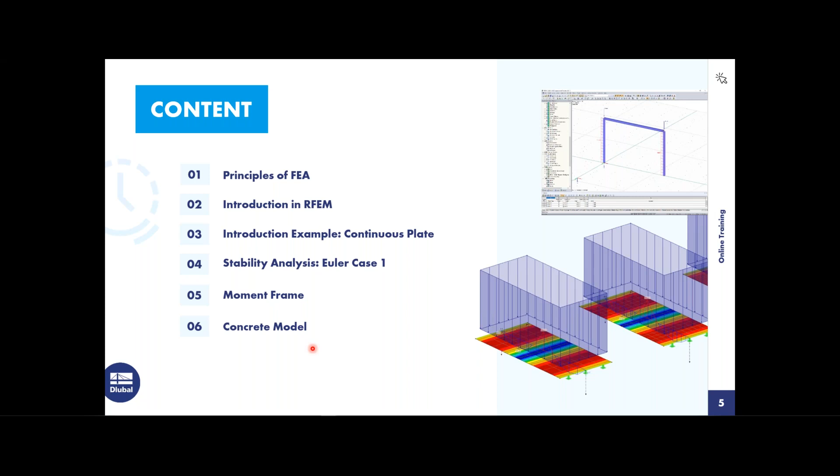Here's the content for today's training. First, we're going to start off with learning about the principles of FEA, and then I will go into an introduction to RFEM. After that, an introduction example will be done for continuous plates. Then I'll go through a stability analysis, or Euler case 1 example, followed by a moment frame example. Lastly, we'll end with a concrete model, and I'll try to leave some time at the end for questions as well.

To start off, we are going to go through the basics of finite element analysis. Computer software is based on the displacement method. Another method you may be aware of is the force method, where the unknown is the force, and you can calculate the internal forces based on this. With the displacement method, the unknown is the displacement of the structure or element you are modeling. First you calculate the displacement vectors using the displacement method, then the internal forces, and after that, the support reactions.

An analytical solution can be proven difficult with large complicated structures. Doing high-end calculations for a large complicated structure can almost seem impossible, and the limits are basically being reached for this, so it is hard to yield accurate results. This is where FEA is then required.

With FEA, the structure model is taken into the program and converted into a finite interconnected element mesh. Then the material and cross-section properties are given at each of these FE nodes, and the mechanical behavior is transferred between each of these elements within the structure. I would also like to point out a good word to know: discretization. This is basically when the structure mesh is being submeshed into finite elements. I'd like you to walk away with this word.

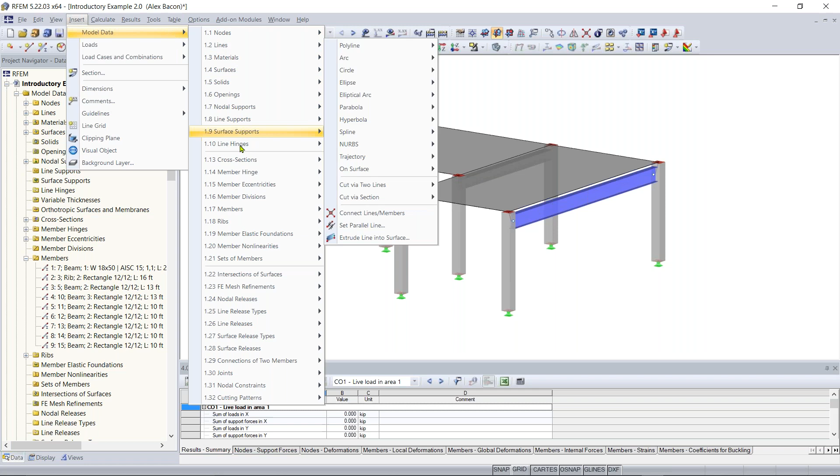We also have the insert menu up here in our menu bar, and this is where you can access model data and create nodes, lines, materials, etc. You can also create loads within this insert menu.

Now, if we want to change our view within this work window, we can do that up here in the view section of the toolbar. If I want to get a side view of either the XZ plane or the YZ plane, we can do that. We can also look at the Z direction to get a top-down view. There's also more options within this drop-down menu, and we can view the reverse Z direction to get a bottom view of our structure. We can also set our structure to an isometric view to get a nice clean view, which is also helpful if you need to reset the view of your model.

On the left-hand side here, back in our project navigator, we have at the bottom the list of add-on modules within RFEM. With the student license, you do have access to all of these add-on modules, which is very nice.

These add-on modules are used to design. RFEM is great for getting the analysis of internal forces and deformations on your structure, but if you want to design something, such as a concrete member or a concrete surface, you need these add-on modules. You don't have to have all of them—let's say you only want to design concrete members and surfaces, you can simply purchase those add-on modules. But for you guys, they all come with the student license.

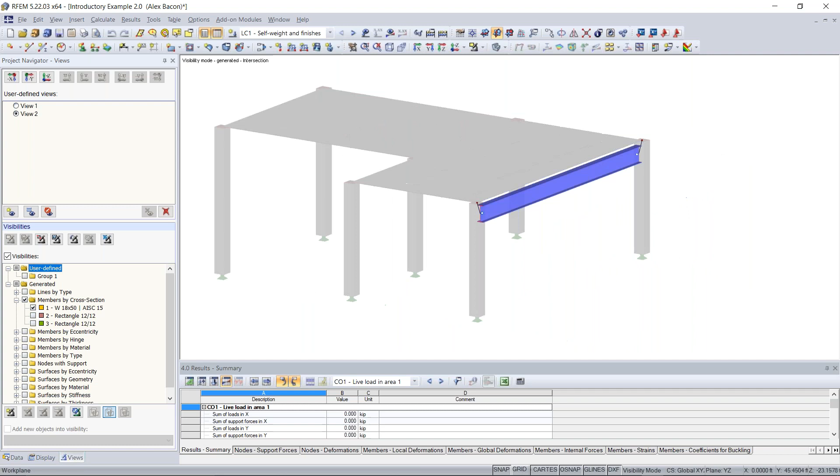Next tab is the Views tab. Within the Views tab, you can create visibilities. Let's say you want to view only members by cross section—I can go up here to members by cross section and click on these. Let's say I only want to view my 18 by 50 W shape—you can do that easily within this Views tab. You can see the visibility is checked on, so I can turn that off, and now I get the whole view of my structure. You can also go up here and create or save customized views if you would like, so you can easily access them.

Next, we can view results. I can go up here to my Calculate All button, and this will run a calculation on our structure. Right now I'm only viewing one load case, the self-weight of the structure, so you can see all my global deformations are being shown right now. I can get an idea of how the structure will handle the self-weight. On the right-hand side here we have our panel, which gives us the corresponding numeric value with each color.

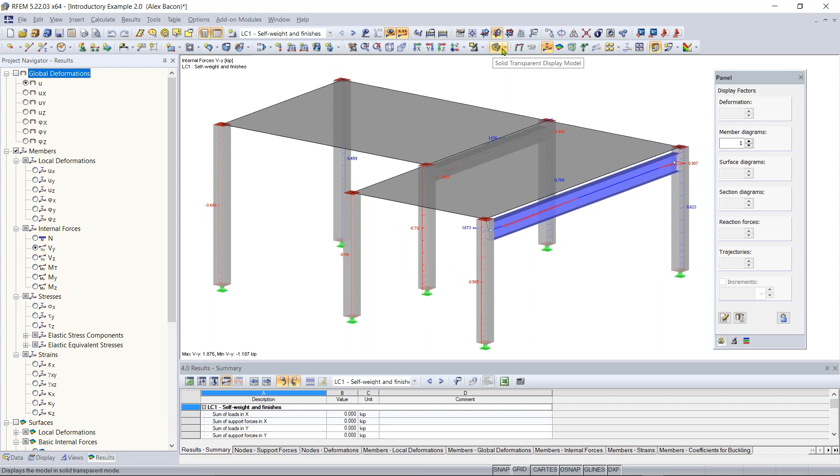On the left-hand side here, again, we have our options or data organized in trees. Right now I'm viewing my global deformations, but maybe I want to view the internal forces or the shear on my members. So I can view the shear in the Y direction on my members, and that will give me these diagrams. You can see I can also change the rendering of this model to get a better view of these diagrams—I can change the view to just a wireframe view. The red diagrams show negative, which are compression forces, and the blue show positive forces, those in tension. I can also view my moments and my axial forces as well.

So basically, that is the overlay or overview of the UI within RFEM. We'll get more in depth in this within the examples coming up.

And now I would like to pose a question or a test. So now this test will launch right now. I'll give you guys about half a minute to answer that. I'll give you about 20 more seconds. Wait for the majority of people to answer. Okay, looks like mostly everyone answered, so I'm going to close the test about right now.

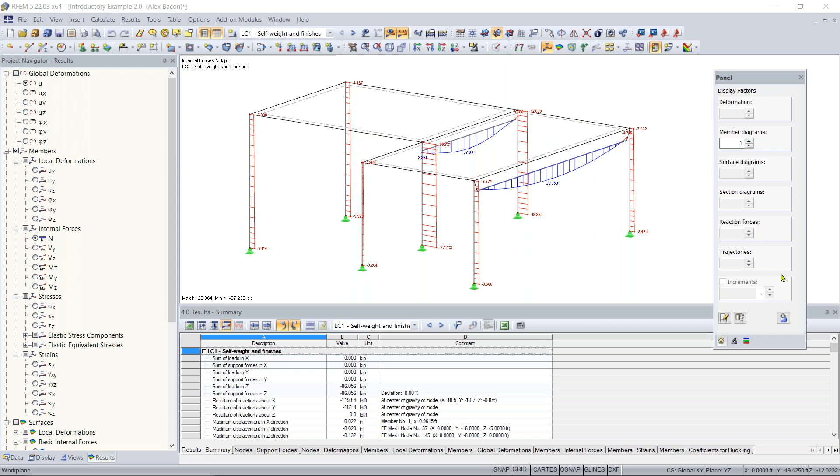So I'm going to hide that. And now you should see RFEM. Up here, if you don't see your project navigator or the table at the bottom, there's two buttons next to your toolbar here, and you can turn on and off the project navigator. You can also turn on and off the table at the bottom here. I usually like to have the table turned off just so you have more real estate within your work window.

So now to move on to the continuous plate example. The first thing we want to do is go up here to the left-hand side, and we can click on our button up here called New Model. You can also find this under File, and we can hit New. This will bring up our general data window for us to create our new model. Basically we just have to enter in this information and work our way down. The first thing I'm going to do is enter the name. So I'm going to enter the name continuous model.

You can enter a description if you'd like, but it's not required. You can also have your own projects or have RFEM organize your models into project folders if you'd like by creating a new project and checking out your project manager here. I'm not going to do that for this example. And then for this type of model, since we can have it as just a 2D model, I'm just going to keep it in a 3D model, but you also have the options to only create 2D models if you'd like.

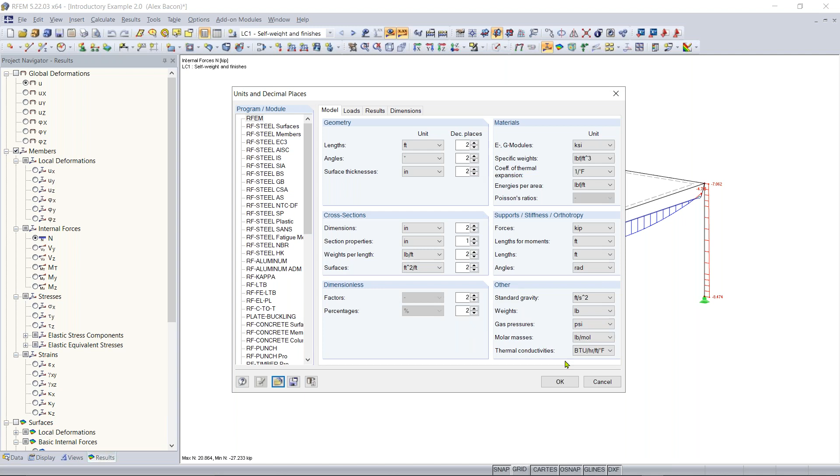And that'll change and convert all of your units to metric. Here you can also change individual units throughout the model, loads, results, and dimensions, and you can also increase or decrease your decimal places as well. I'm going to leave all that as default and leave it in imperial. And then I'm going to click OK.

So now you can see that we have our blank work window, and this is where we're going to be modeling. There are lots of different ways you can model. You can use the tables to enter input data if you find numerically inputting your model data more efficient.

For this example, I'm just going to use the tools in our toolbar. I'm going to go to the left-hand side and click New Single Member. This would be the tool to use if you were going to create your I-beam or members, but first we're going to model the continuous plates, so I'm going to exit out of that.

Then I'm going to go to this tool called New Rectangular Surface and click on it. Now you can see we have our New Rectangular Surface window, and this is where you're going to enter the data needed to create the surface.

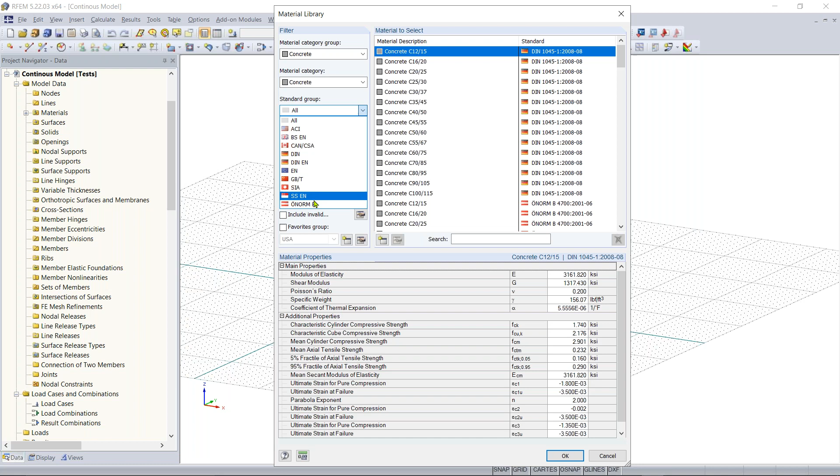Now you can see this window pop up called Material Library. On the left-hand side we can filter by category group and then standard group. First I want to click on this dropdown and select concrete, and the material category I want is just regular concrete. Then for the standard group, I'm going to use ACI, but we also have other standards such as CSA, etc. So I'll choose ACI, make sure I choose the latest ACI standard, and then I'll just use 4,000 PSI concrete.

You can also edit the material if you'd like once you create it. I'm going to click OK, and now you can see the material is set to 4,000 PSI concrete, and my option to edit material is right here. You can edit any of these material constants, such as the modulus of elasticity, shear modulus, Poisson's ratio, etc. You can also create a new material if you'd like.

Now I would like to change the thickness of this material. Right now it's set to 8 inches by default. I'm just going to make this 12 inches, and then I'm going to click OK.

Now I'm going to just rotate my grid plane here. You can see that we have our origin at the center, and my cursor has the coordinates locked to it, and you can see that it snaps to any of these points on the grid.

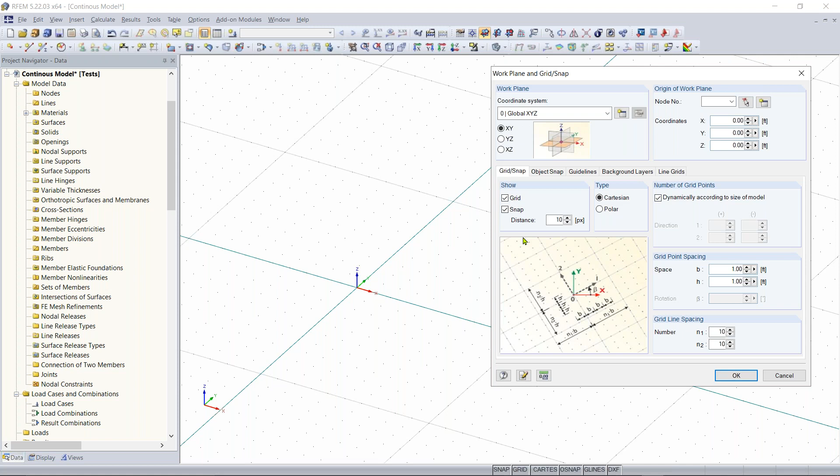We also have this nifty option called dynamically according to the size of manual or of model. This is nice because if you don't want to worry about how big your grid is, and you just want the grid to change size depending on the size of your model, you can have it do that.

So now back to creating this rectangular surface. I'm going to click on rectangular surface again, and then I'm going to click on OK, and this will bring my modified cursor back up.

So now I'm going to rotate the model using the mouse and keyboard, and click on the origin, left click, and now I am drawing my rectangular surface. I want this rectangular surface to be 32 feet by 16 feet, so I'm going 32 feet in the X direction, and I'm looking at my coordinates seeing 32, and I want 16 feet to be my Y coordinate or height. I'm going to left click, and now you can see that rectangular surface has been created within this grid plane.

Now I'm going to create another rectangular surface 5 feet above this one. So that's going to be here. I'm going to left click, and then draw it again and make sure that it is 16 feet high. So that will be right about here.

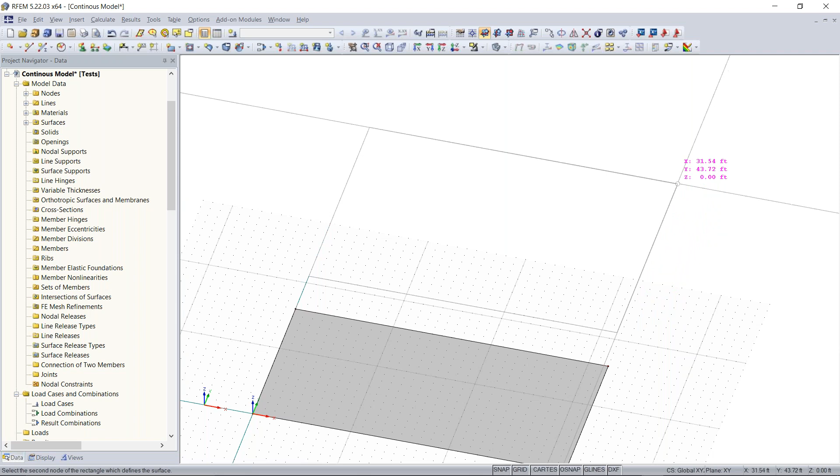And that looks too high. So what we can do is highlight, double click on the node. I can change this from 44 feet to 36 feet. There we go.

So now that our second plate has been created, instead of having to recreate this plate, we can simply select the whole plate and copy and paste it. I'm going to select this plate, and we have a feature called move and copy. I can right click on this plate and go up to my move and copy tool, or I can also use the move and copy tool in the toolbar.

You have to make sure that you have your element highlighted. This is also a good time to mention highlighting things. Highlighting something from left to right is different from highlighting something from right to left. If you highlight from left to right, this will only select elements within this window, but if you highlight from right to left, it'll select any element that touches the window.

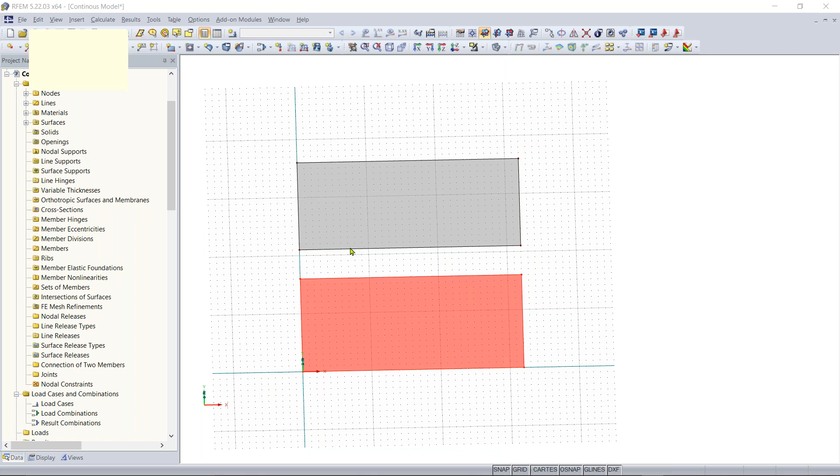So I'm going to highlight this plate, go up to my move and copy tool, and make just one copy of this plate, moving it in the Y direction. I can enter the coordinates where I want this plate to go, or I can use this button to create a displacement vector graphically. So I'm going to click on the corner of my plate, and I want it to be 5 feet above this plate. So 2, 3, 4, 5.

It's going to go right here. So now that my vector is created, it's going to move it 41 feet in the Y direction, make one copy. I'll click OK. And now you can see that the plate has moved 41 feet in the Y direction, and it's 5 feet above the second plate.

So now I want to make all these three plates, and I want the center of all of them to be on our origin. So I'm going to highlight, and then click. I want this corner, this left-hand corner of this plate, to be on the origin. So I'm going to click on that, and then move it down by just left-clicking and dragging. That's an easy way to highlight and move things within RFEM.

Now we can create the continuous beam, or create the new member. So up here, this button I showed earlier, we can click on new single member. And you can see that now our new single member window has popped up. Again, this looks pretty familiar to the rectangular surface. We have our member number here, and then down here, we have our cross-section.

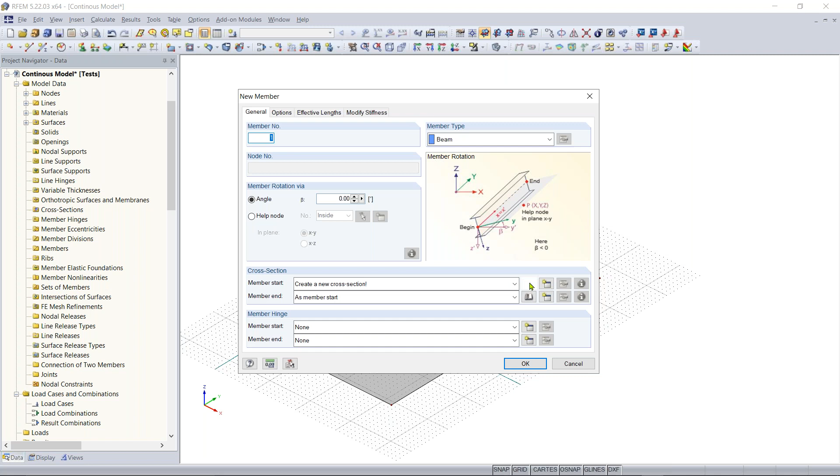This is where I'm going to create my cross-section. So right now there's no cross-section defined, so I'm going to go here to import from cross-section library, and I want to create a rectangular concrete cross-section. Within this library, we have rolled sections, built-up sections, parametric thin-walled sections. Today we're just going to focus on our parametric massive sections, and I want to make a rectangular section. So I'm going to click on rectangle, and you can see you have lots of different types to pick from within these cross-section types.

I want the base of my cross-section to be 40 inches, and the height of the cross-section is going to be 12 inches. This is the same thickness as our plates, 12 inches. You can see how the base and height correspond in this graphic here. You can also see that the material is set to concrete 4000 PSI. So I'm going to click OK.

And now my cross-section is shown on the right-hand side here, and the start of my member has this particular cross-section. So I'm going to click OK.

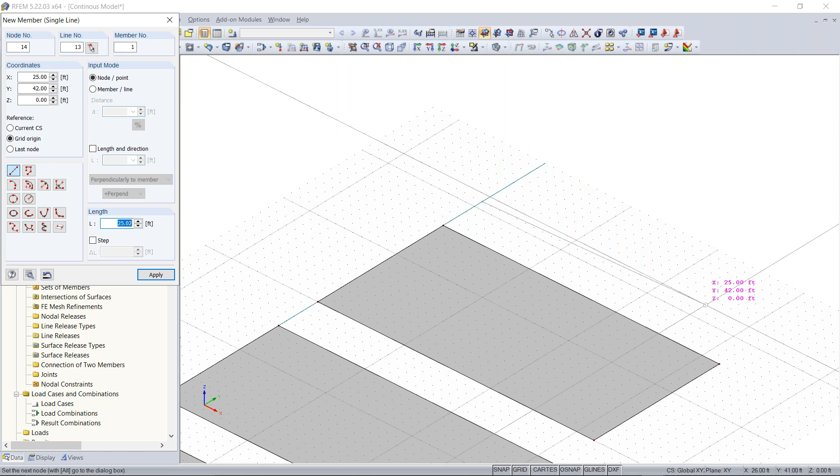And now my cursor is ready for me to draw in the work window the continuous beam. I'm going to space this 5 feet away from my previous plates, and I'm going to left click here—you can see there's a line showing you what you're about to draw. I'm going to make this the same length as my plate. I'll left click, and now you can see my rectangular concrete beam has been drawn.

Now we can go through, and I want to add a line, or a continuous support, down the middle of these plates, and I want to add a support to this beam. So let's say I want to divide these lines here. Right now they're continuous lines, and I want to divide them and add a node in the middle so I can draw a line down the middle.

An easy way to do that is just to right click on the line. You can right click anywhere within this work window, and you'll see a list of tools that are easily accessible—these are the tools you'll mostly use. You can also turn off and on some other options in this menu. If you want to edit an element, you right click on that element and get different tools based on what you've clicked on. You can also edit or delete the surface within this menu.

So down here, I'm going to start with this line. I'm going to right click on this one line, and then go up here to divide line. You can see under divide line we have 3 different options. The first option I'll show is how to divide a line by distance. I basically just want to create a node at the middle of this line, so I want to set the line start at 50% and the line end at 50%.

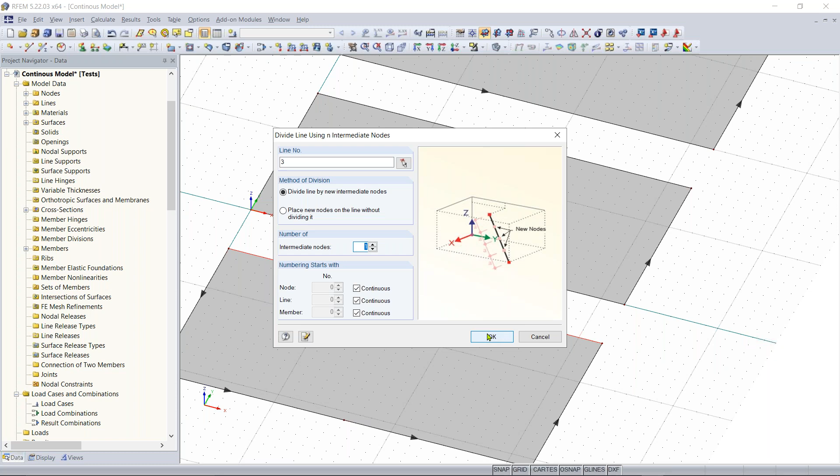So now I can do this for the rest of my lines. I'm going to right click on this line, and I can also do this by going to n intermediate nodes, and set that to 1. This will equally space out the nodes depending on how many you want to place on your line—so if I just create 1, it'll divide the line and create this node in the middle.

The third option for dividing a line is doing it graphically. Once I do that, you can see the coordinate pops up next to my cursor, and I can place that node anywhere I want on the line and click to divide it. Then I can right click anywhere in the space to cancel out of that tool.

Now I'm going to do that for the rest of my lines. I'll right click, divide line, distance. Instead of doing this for each individual line, I can go up here to the select lines button, select the rest of these lines, and hit OK to divide all of them as well. So now we have nodes at the middle of our lines for each of our plates.

Now I'm going to do the same thing—divide this member. Again we have the same options. I'm going to do this by distance, and make the node at 50% of the member. So now our member is divided as well, with a node there.

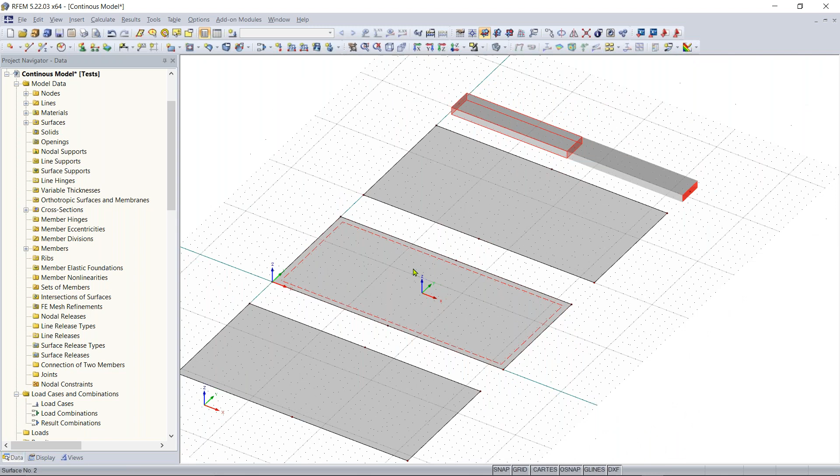Now I'd like to draw a line connecting these 2 nodes—this is where our line support is going to go, supporting the midspan of these plates. I can go up here, and there's a tool next to the new single member tool called New Line. I'm going to click on that, and now I can draw just a line connecting these 2 nodes. When you draw a line, make sure you right click outside of it to cancel out drawing the line continuously. I'm going to connect these two nodes here.

Now that those nodes have been connected, we can simply add our line supports in as well. I wanted to show you another great option: if you press Control Z, you can undo things. And instead of having to draw the rest of these lines, I can hold Control, then left click and drag, and that will make a copy of anything that was highlighted.

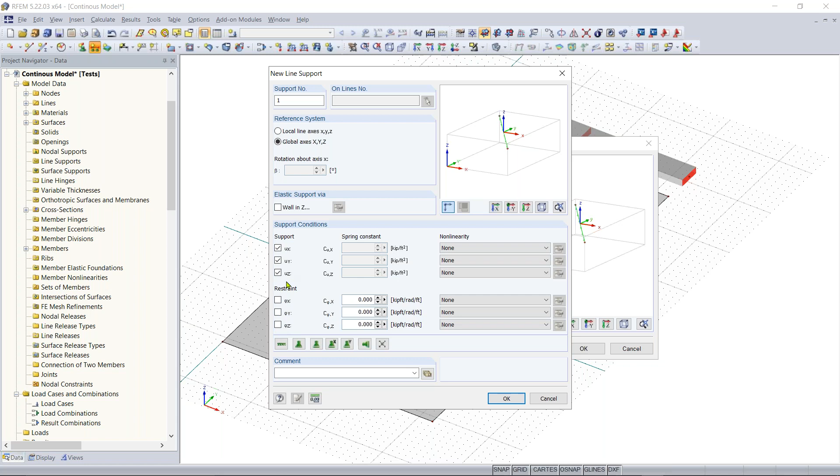Right now, our support is set in the translational to all fixed. So if I check off UX, that means the support will not allow the structure to move in the X direction. But if I uncheck it, that unlocks that direction. Right now, all rotation is not fixed, and the structure is able to rotate about that support. So this is what we're going to keep. I'm going to click OK again.

Now we can apply this line support to all of our midspan lines here. So now you can see this green line along with our green line supports is added. I also wanted to add the support to the edges of our plates.

To do that, I'm going to hold Control, click, and add those line supports to the ends of our plates as well. Make sure everything is highlighted before you click, hold Control, drag. Now we can add those supports to our outside lines as well. This one doesn't seem to want to go - no matter, I can just go up here to my tool, click OK, and just add that graphically.

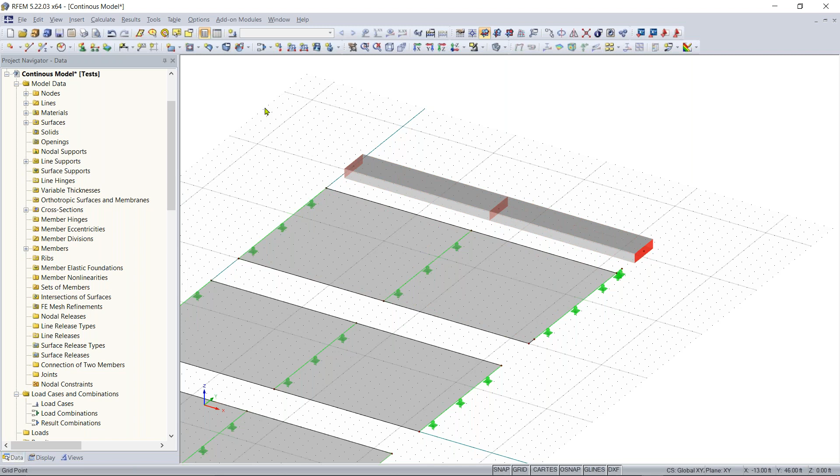To do that, instead of adding line supports, these are just going to be nodal supports. So I'm going to go up here to New Nodal Support. The first two nodal supports, the midspan support and the first end support, are going to be a hinge support. I'm going to simply add that to these two nodes right here and right click. Now you can see we have a hinge support in the middle that allows full rotation but no translation, and this end support allows full rotation and no translation.

Now we just have to add one more nodal support to the end here. This one's a little bit different - I'm going to create a new nodal support for this one. This one is right now allowed to rotate about the x-axis, but we don't want that, so I'm going to fix that. So now the member is not allowed to rotate about the axis, which if we did not do this, it could rotate indefinitely and create a stability error within the program.

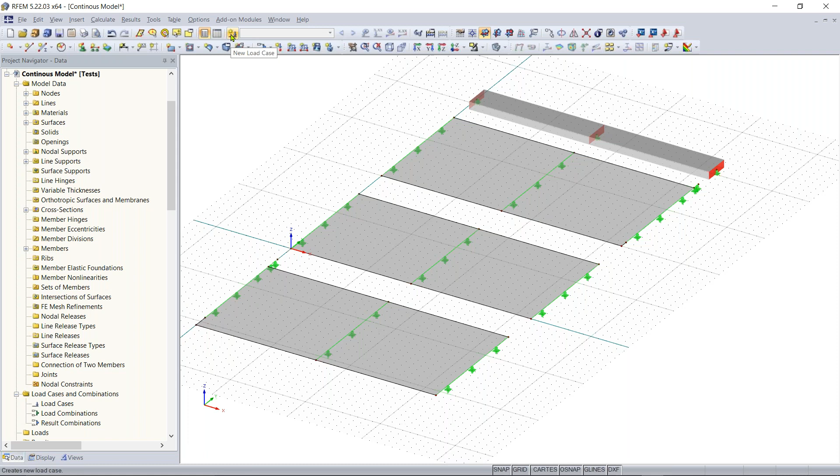So now that we have our supports defined and all of our model data entered, almost, we can now focus on adding the loads to these different elements. It's important that when we add our loads in, we create a new load case, because every load needs to be assigned to a load case. To do that, we can go up here to this button called New Load Case and click on that. We can also go on the left-hand side in our project navigator, down to Load Cases and Combinations and Load Cases, and right-click on Load Case and click New Load Case.

So now you can see that the Edit Load Cases and Combinations window pops up, and we are under our Load Cases tab here, and the program has created a new load case for us. I'm just going to call this load case test and dead load.

I'm also going to put in here that the self weight of the structure is off. Right now that's the title, and the action category of this load case is dead. For dead loads, the self weight of the structure is automatically taken into account, but for this example, I'm going to turn that off, and I'm going to click OK.

So now our load case is created, and you can see that up here in our drop-down window, we have one load case. And now I can apply the loads to the surfaces.

So now I'm going to go up here to this tool called New Surface Load. The load type is going to be a force, and the load distribution is going to be uniform. We have other options here, but for this example, we are going to stick with these two. I want this force applied in the global related to true area. So this is all good, we don't have to change any of this.

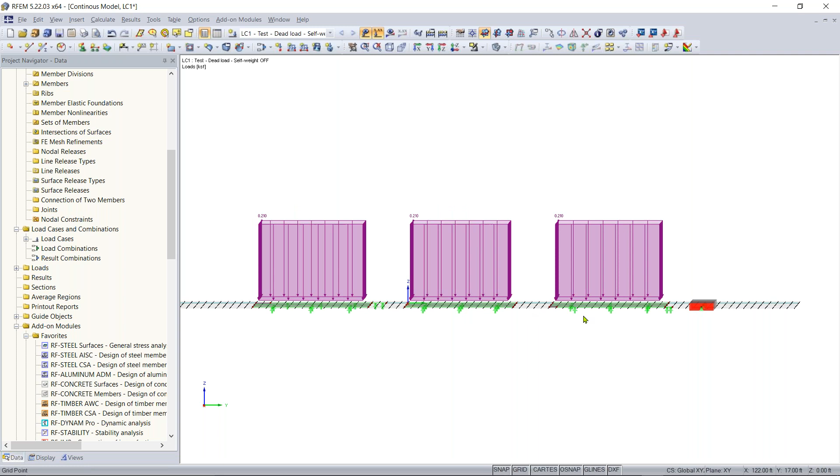So rotating the structure, you can see that our loads are applied to each plate, and we need to add a load to our continuous beam here. I can also increase the size of these nodes. There we go. And now I can add in a member load.

So to create a new member load, this is up here in this toolbar next to new surface load. I'm going to click on new member load. Also another thing to keep in mind is we have a tool for member loads and a tool for line loads.

So just remember that you should use member loads for members and you should only use line loads for lines. Line loads are basically if you wanted to apply loads to only the perimeter of these plates or to these lines. And then member loads are for members or beams and columns.

This member load window looks basically similar to the plate load window. Under the load type, we have force, which we're going to keep the same, and then we have a uniform load distribution, which we're also going to keep the same. This load is going to be applied in the global related to true member length Z direction. So all this by default looks good.

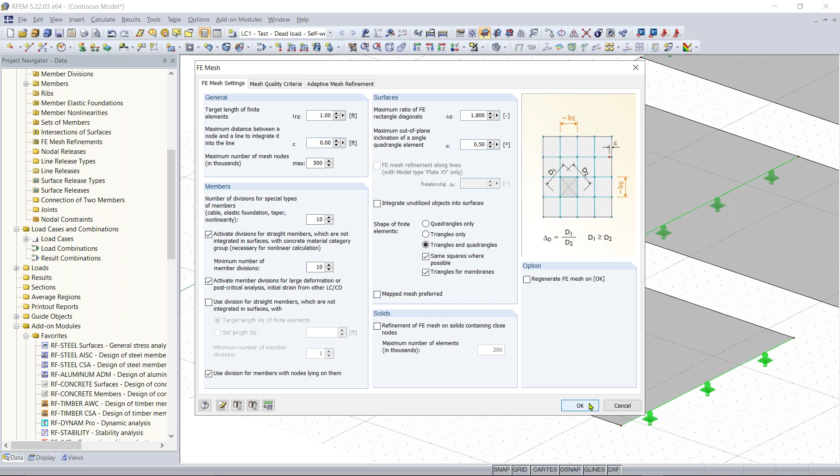But let's say we want to change the FE mesh of an individual element. We can do this, and I'm going to do this solely just for this example, just to show you how the results differ for a larger FE mesh compared to a smaller FE mesh.

So what I'm going to do is double click on this plate, and this will bring up the Edit Surface window here. This is nice because if I wanted to change maybe the thickness or material of the plate, I can do that very quickly.

And I'm going to go up here to my FE mesh tab, and then I'm going to go to FE mesh refinement, and I'm going to click Available. So that will create a new FE mesh for this whole entire surface. And I can change this FE mesh length to 0.75 feet. I'm going to click OK.

And now you can see this icon here has been added to our surface. This tells us that we have an FE mesh refinement applied to the surface, and also gives us an idea of how large that refinement is with this icon.

Next, I want to add an FE mesh refinement to the second surface. And just to show you another way to do this, you can go over here to your project navigator, and where your surfaces are organized, you can see we have 1, 2, and 3 here. I'm going to double click on 2.

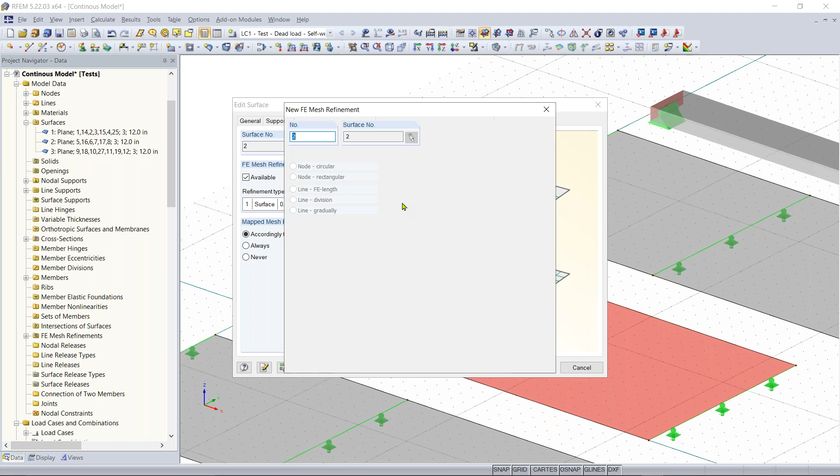I want to create a new FE mesh refinement, and I want to make this one 0.5 feet. So this one's going to be a little bit smaller. I'm going to click OK.

And that icon was added, letting us know there's an FE mesh refinement on that surface. And then I'm just going to add one to this third surface by double clicking on it, going to FE mesh, and then Available.

And I want this one to be even smaller. So I'm going to create a new one for a surface, and then I'm going to make this one 0.25 feet. I'll hit OK again.

And now you can see the first plate has the largest FE mesh defined, and it's going to get smaller as we go down the list here.

Now I would like to create section cuts before we run our results. Section cuts allow us to get an idea or show us a diagram of results, and we want this to be down the middle of our plate.

So to do this, I can go over here on the left-hand side in the project navigator. And to create a section cut, I can either right-click on the Sections category here, or I can do this up here in the toolbar with this button called New Section. And I can create a new section numerically.

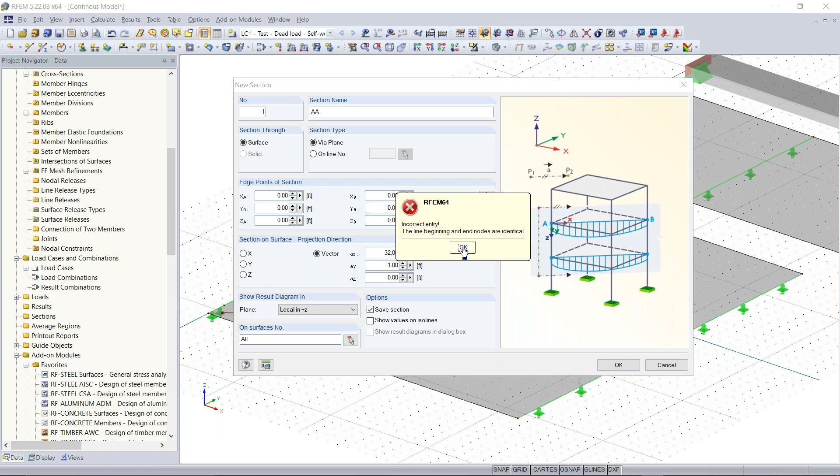Let's try creating this one more time. I'm going to go over here to New Section, create my plane vector, and enter my name.

So let's try this on a different plate. I'm going to enter my section name. Then I'm going to draw my section vector. And it's telling me that the line, beginning, and end nodes are identical.

I believe that my line supports are not defined correctly here. So I'm going to delete that, and I'm just going to define my line supports again. Also check to make sure that these are defined correctly and I don't have multiple line supports on top of one another.

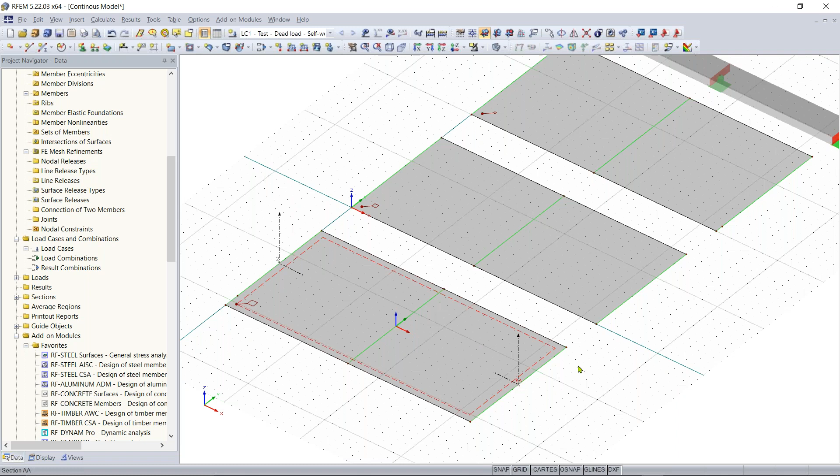So we have our section name, vector, click OK, and now we have our section created. So now I can turn my line supports back on under the display tab. And now our first section here is created on our first plate. So now that our line supports are defined correctly, we have our first section cut.

And let's say I want to create — oh yep, yeah, I can show you that one more time. Okay, so yeah, the section — basically, if you want to create a section cut, you can do that by going over here to the section category, and you can click on new section.

I'll just go over it one more time just to make sure it's clear. So the section name, you can enter up here. It's going to be via a plane. And the vector, you don't have to worry about. You want to make sure that you set your first edge point and your second edge point, so point A and point B.

You want to click this button right here. You can define these coordinates here if you'd like, but you can just click this button here to do it graphically. With your cursor, you can click your point A, and then you can click your point B. Once you do that, you can hit OK.

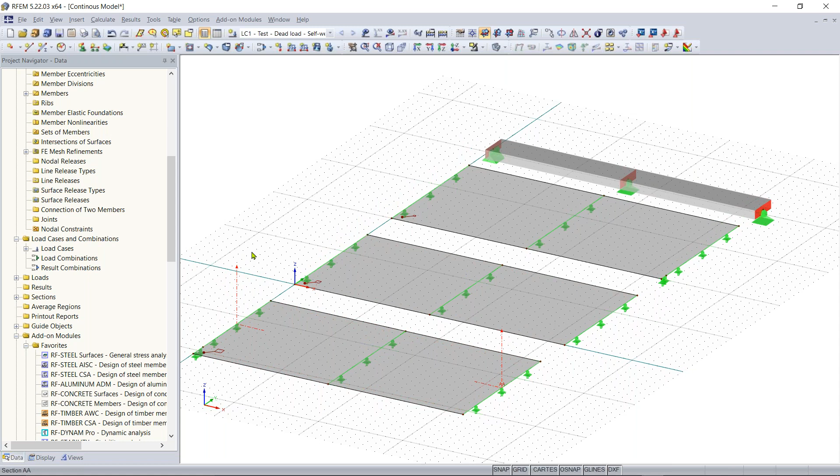So also to continue, if I wanted to create — instead of having to define it for the rest of these surfaces — I can hold Control, left click, and drag the section cut, and it'll just place that section cut on the rest of my plates. Make sure you hold Control, or make sure you highlight it, hold Control, and then click, and that will copy it.

So now that we have our section cuts defined here in the projected local Z direction, we can move on to our calculation and showing our results.

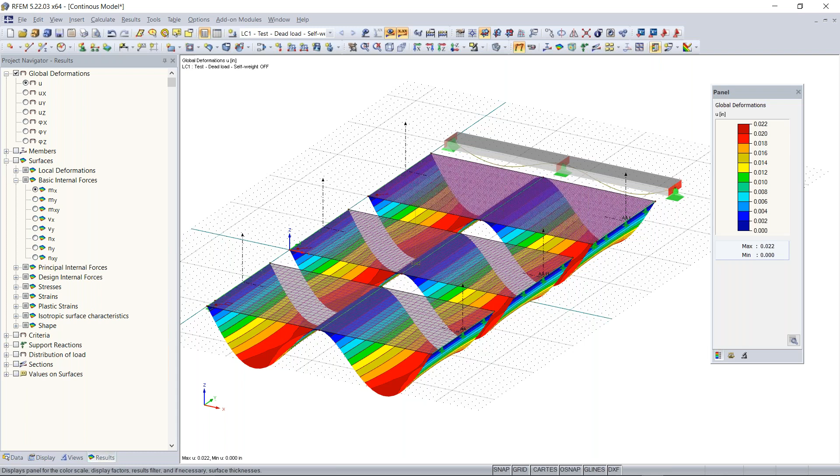Again, we have the panel on the right-hand side. If you can't see this panel, you can also turn this on and off up here under the toolbar, just like the project navigator and the tables. So that can be turned on and off. Then you can see on our continuous beam here that our deformation is just shown as this yellow line.

Let's say you want to view it as a colored cross section, kind of like these planes. We can do that by going under here to the display tab, and then we can go over here to our results section. I'm just going to collapse my model options here, expand results, and then under the deformations section right here, I'm going to expand that, and then expand members, and here I can choose cross sections colored. So now that that's activated, I'm going to go back to the results tab.

Maybe we want to view the internal forces on our member here. We can turn off global deformations, uncheck that, and I'm going to expand members here, turn on members or results for the members. And maybe I want to view the moment about the y-axis—I can turn that on under internal forces.

And now we get this moment diagram that is illustrated on our beam. You can see that, again, blue is tension forces, and then we have our peak here, which is our compression forces.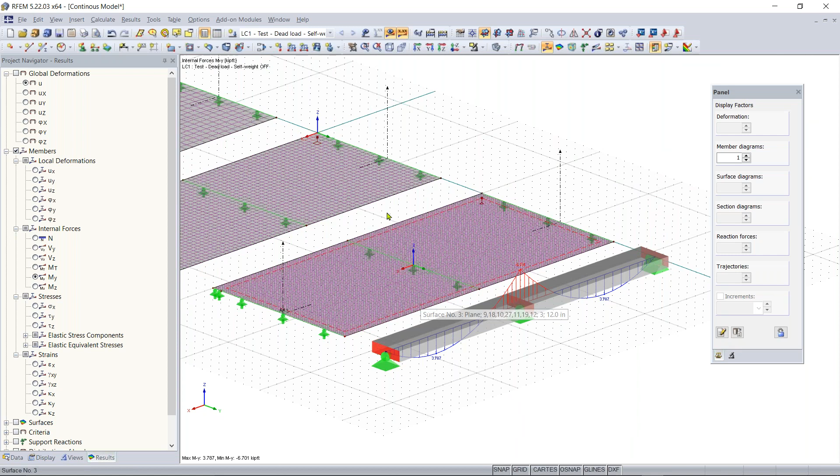And then we can also go in and view the internal forces of our plates here. I can turn those on simultaneously by going over to my surfaces category and checking that off. Right now we are viewing the basic internal forces, mx, of our plates. Each color, and its corresponding value, is shown in our panel here. On the side, we can get our max moment and our lowest moment right here.

Let's say you want to view a diagram on these plates, just like the one in the member, to get a better idea of the peaks and valleys. So we can go over here on the left-hand side and click to turn on our section cuts. Now you can see we have our peaks and valleys, or our tension and compression forces, based on our section cuts. That gives you a better visual of the moments on our plates.

Now you can see the results, and you may be able to spot the difference in accuracy of the FE mesh here. Our diagrams become more accurate as the FE mesh size decreases as we go along. So now is a good time to mention, I think I might have mentioned this before, that the size of your FE mesh does affect the accuracy of your results. A bigger FE mesh may yield less accurate results compared to a smaller FE mesh.

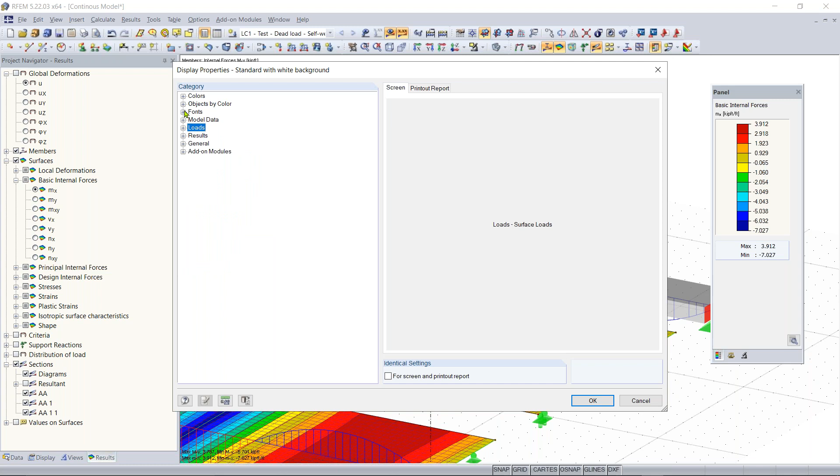So we'll go to fonts, then to results, and then within here, internal forces of members. Once this comes up, there's a button called set font. Once that's open, you'll have your size window here. I'll click on this and enter 11, then click OK, and you'll see that the font size has increased within the window.

So I think that should answer that question for Julian. No problem. Awesome, so I think that's all the questions for now. Now we can move on to...

We were going into, oh right, the FE mesh. So just one more time, up here for FE mesh, we can go under calculate.

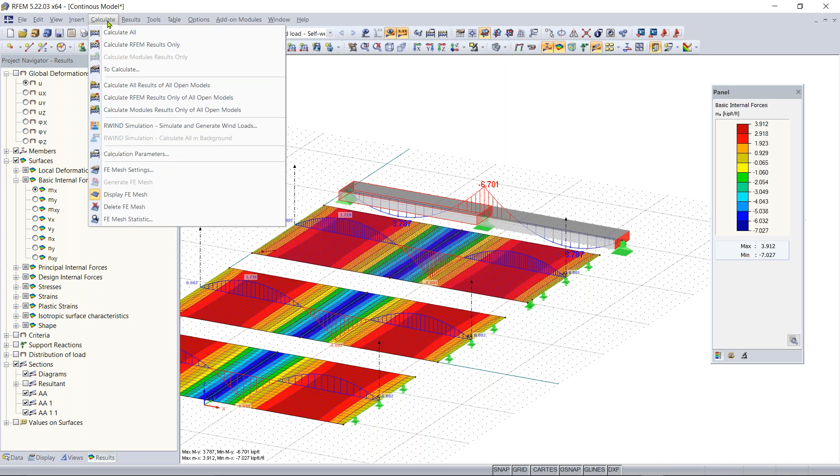Under calculation, we can go to FE mesh settings. I did mention this before, but I'd like to mention again that you can change the global FE mesh. If you have a large structure, you don't have to change the individual FE meshes - you can just go up here and it'll change the FE mesh of the whole structure. I'll click OK and everything's good in there.

We have another question from one of the attendees. Has the result of the stresses been verified against Roark's formula for stress and strain? I appreciate Roark's formula is primarily for linear analysis, small displacement. I don't know that information right offhand. It doesn't strike anything within me that we've used that formula for comparison, but of course we've run many different verification problems - I'm just not sure which theory. So if it's okay, we will just get back to you on that after the training.

Yep, okay, that sounds good. Thank you, Amy. Then we can move on to the calculation parameters, which we can change within here.

So we are going to get into the theory a little bit. Roark's formula isn't something we are going to discuss, but we can go up here to calculate, and then down to calculation parameters. Once this window pops up, you can see we have many options here, but I just want to point out and isolate one option here, called activate shear stiffness of members.

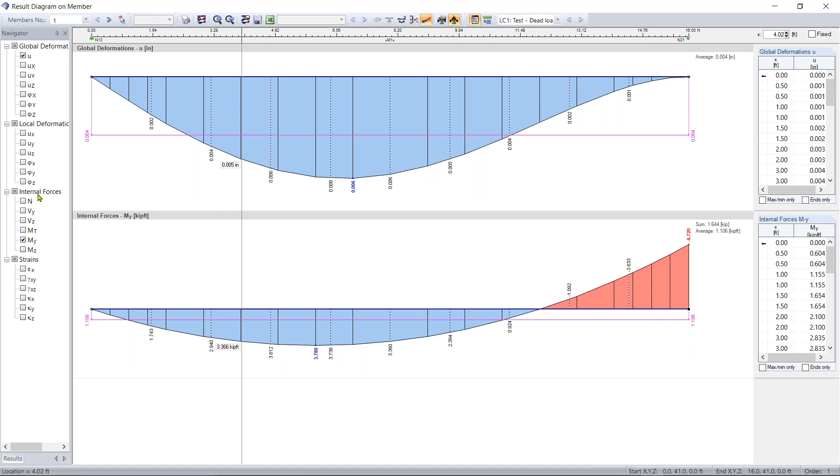You can also turn on and off other diagrams or results here. So if you wanted to view that for the plate, you would just have to click on the section cut here, right click on it, and then you can also open up this results diagram as well - this should come up. Once it loads, you can see your global deformations, moments - this is a load. If you want to see maybe your shear, you can turn that on as well, so that should be down here.

And then we have another question for continuous beams. The thickness plays a great role for thin and thick plates. How do we handle this issue here in RFEM? And I can go ahead and answer that.

Yes, it is important, a thin or a thick plate. When you're getting into a surface element, if its thickness is relatively comparable to its width, then you would want to convert this to a solid element, a 3D solid element. We have some recommendations in our FAQ for when you need to consider a solid element instead of a surface element in order to get accurate results. But a good way to think of this is a brick element. If you're trying to model something that looks more like a brick, then probably a solid element would be better than a surface.

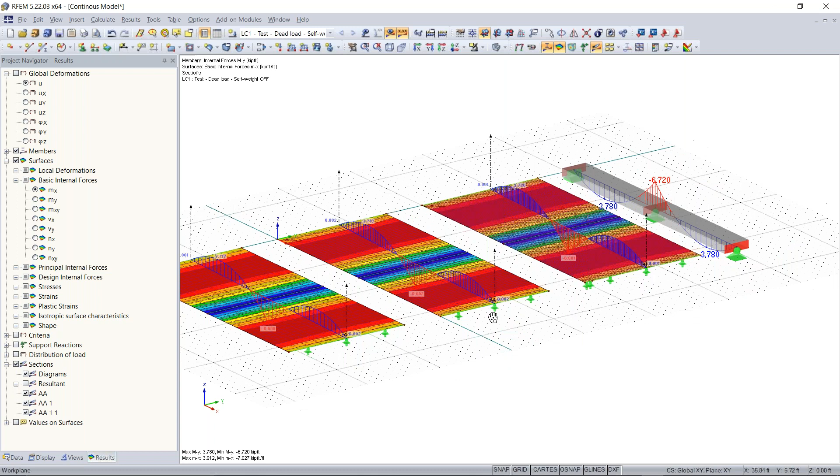Awesome, great explanation. Yeah, unfortunately, I'm not getting into any solid elements this training, but we do have those FAQs and lots of resources on our website for that.

I do see this other question: how do you change the sign of compression and tension in the moment diagram?

So, I'm not sure, I don't think you do. Within the diagram, the sign tells you which point is in tension and which point is in compression, or for the moment diagram, it would be your direction of bending, this is moment. This is based on the right-hand rule. When you're looking at moment diagrams, you have positive and negative moment, and that's the convention that RFEM goes off of. So you don't have the ability to change the sign within the program. It goes off of the right-hand rule.

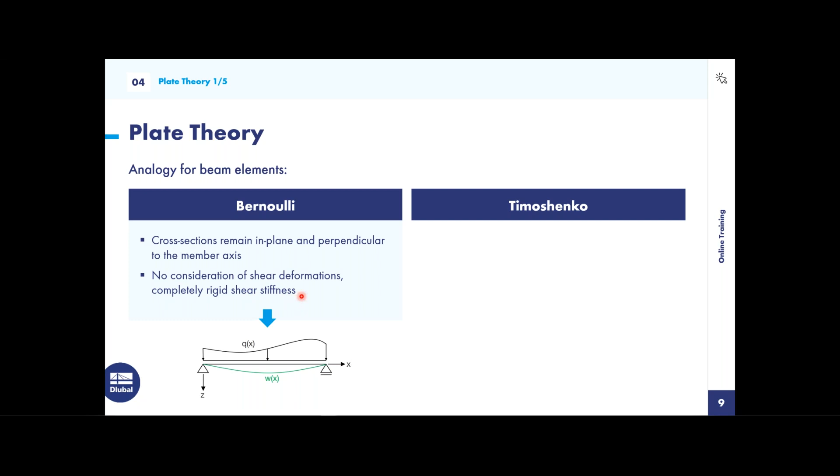Now we can get into some plate theory for RFEM. This is an analogy for beam elements. One of the theories for beam elements is Bernoulli's theory, and another theory is the Timoshenko theory. For Bernoulli's, these are the two assumptions we make: we assume that the cross sections remain in plane and perpendicular to the member axes, and Bernoulli's simplifies and assumes that there's no shear deformation. So the whole entire beam is completely rigid, with completely rigid shear stiffness.

For the Timoshenko theory, again we assume the cross section remains in plane and perpendicular to the member axes. But for Timoshenko, we assume that there are shear deformations being taken into consideration, and the whole member is not completely rigid.

To show a good example of this, I have a graphic. With Bernoulli's, you can see here that the deformation is completely perpendicular to the member axes. And for the Timoshenko theory, you can see that we have an additional angle here, so we have additional deformation. This is due to the additional shear deformations or shear stiffness being taken into account.

So these two theories for members or beams can be applied, or referenced a little bit, for plate elements. This is an equivalent analogy for plate elements. For the first plate element theory, we have the Kirchhoff theory, and a similar theory to the Timoshenko theory is the Reissner-Mindlin, and this works for plates. The Kirchhoff theory you can compare to Bernoulli's theory, and Reissner-Mindlin you can compare to the Timoshenko theory.

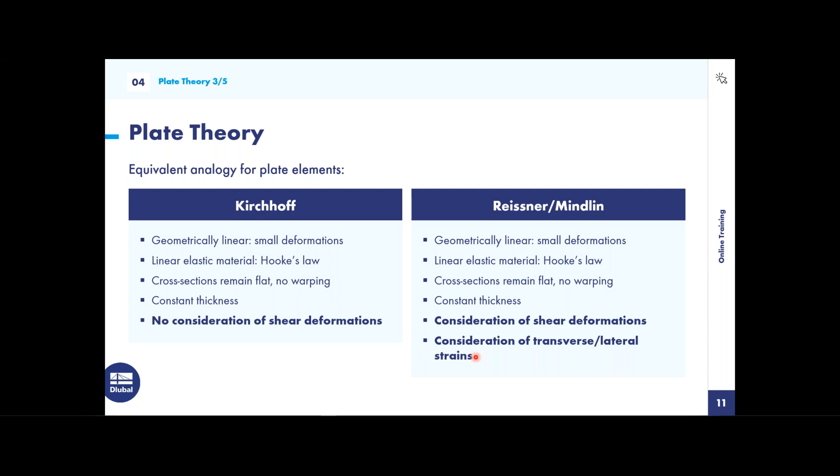For Reissner-Mindlin, the first two assumptions are the same as the Kirchhoff theory. We're also assuming there's no warping, it's flat, and there's a constant thickness of the plate. But for Reissner-Mindlin, we're taking into consideration shear deformations, and we're also taking into consideration transverse/lateral strains. To get a better idea of what transverse/lateral strains look like, we can go on to the next slide, and I have a graphic that helps explain that.

So transverse/lateral strain, for example, here we have a beam. When a tension force is applied along its length, the cross section will shrink with regards to its height and width. This nu factor is what is taken into consideration to account for this shrinkage, and this is what is taken into account with the Reissner-Mindlin theory.

So just to summarize, the Kirchhoff theory and the Reissner-Mindlin theory for plates. For the Kirchhoff theory, no consideration of shear deformations is taken into account, and this theory does yield great results when you use very thin plates, for example concrete slabs. Keep in mind this only considers pure bending, load bearing capacity, and is overall more of a simplified approach.

For Reissner-Mindlin theory, shear deformations are considered. This theory is great for thick and thin plates. The shear influence component is relatively high, and there is significant error when neglecting shear force. We also have a higher value approach for this theory, and for shear forces it yields more accurate results. So in my opinion, the Reissner-Mindlin theory is what you should use almost 100% of the time. It's good to know the difference between these two theories as well.

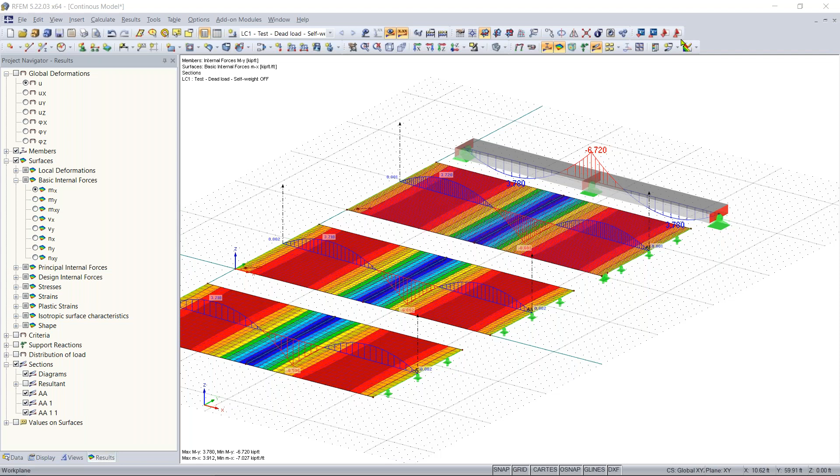So now going back to RFEM, we can look at our calculation parameters again by going to calculate, then calculation parameters. You will see that under global calculation parameters, we have plate bending theory, and you can switch between the Mindlin theory and the Kirchhoff theory.

So right now, let's take a look at the results, and we can see how those change depending on which theory we have activated. Let's take a look at shear. I'm under surfaces, taking a look at my shear diagrams through my section cuts on my plates, and we got around 2 here, around 2 here. That's kind of consistent throughout, even with the FE mesh change.

So let's say I go up to calculate, and I go into calculation parameters. That window will pop up, and I can change from the Mindlin theory, which is by default, to Kirchhoff. I'll click OK, I'll hit yes. It'll clear my results because I changed the parameter. I'll hit calculate all. Our results should change, probably not significantly, but very slightly.

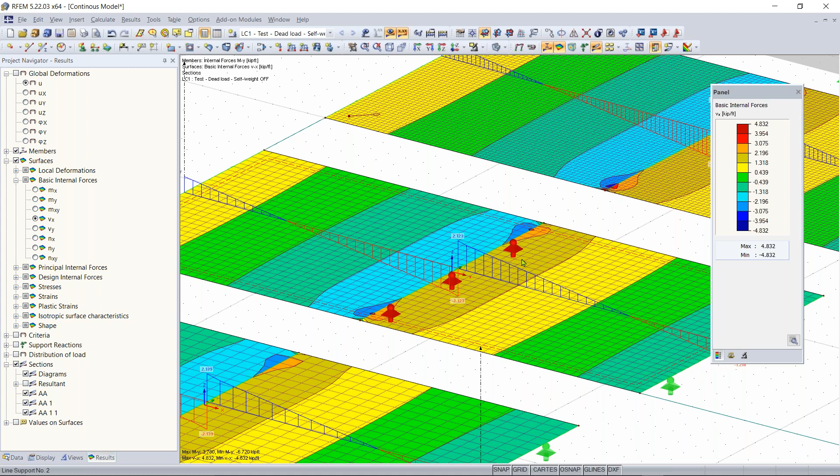So before we had, it was around 2. Now our shear is a little bit higher, at 2.1. You can see that those results have changed slightly. So I'm going to go back and change that back to the Mindlin theory, and while I do that, I have a question for you guys.

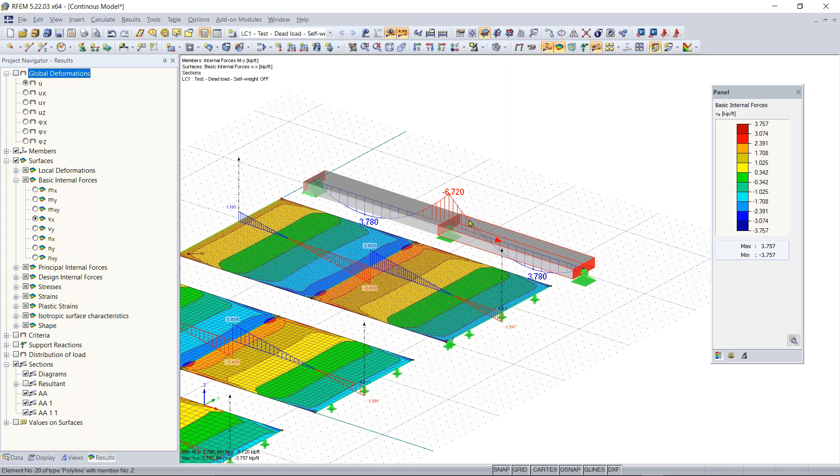And close that window. It looks like there's a question: I would like to know how the cross-section of members will affect the result, because we were turning off the self-weight in this example. Yeah, so for this example I do have the self-weight of the structure turned off. If this cross-section was larger, I would have a larger bending moment because of the weight of the beam. The self-weight is superimposed with the loads that you apply to it, so if self-weight was turned on, you could visualize that as a uniform load applied to this member on top of the load that I applied.

So the shear and bending moments would be higher. I think that answers your question. Yep, awesome, no problem.

Yeah, so now we can move on to the Euler case 1 example frame. So...

Now I can create a new model. I can just keep this one open, but maybe I want to save it first. I can go up here to the save button. Models are automatically, not automatically saved, but they are automatically backed up. So if your program crashes or something like that, the model will automatically be saved and there will be a backup. That's always good to know.

So I'm going to click on new model, and this one I'm just going to name Euler case 1. The type of model is going to be 3D. You can enter a description if you'd like. We're not going to generate load cases automatically based on a standard, so I'm going to keep this unchecked. For units and decimals, I'm going to keep it in imperial units. Again, you can change your units and decimals at any point from this button, and also under the options menu in the program.

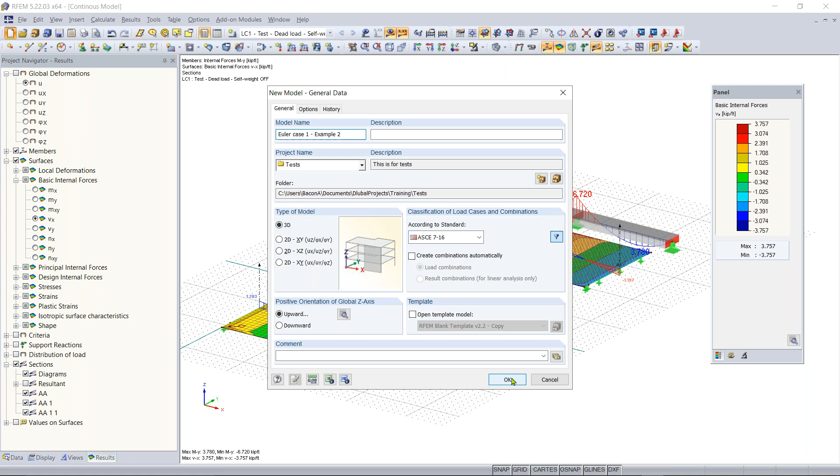I'm going to click OK. It's saying this model already exists, so I'm just going to name it example 2. Click OK. And now a blank work area should pop up with my grid here in the XY plane. For this example, I'm going to create one new single member, so I'm going to go up here to my new single member button.

Then I'm going to create a new cross section, so I'm going to go down here to import from cross section library under cross section. This cross section is going to be an I-beam, so under rolled we have our I-beams here, or I-sections. I'm going to click on that.

Under I-sections, I'm going to have a W-shape section here. On the left-hand side we have our filter again, so we can filter to lots of different standards. For this example, I'm just going to be using the AISC American standard, and for the manufacturer standard, I'm going to keep the latest 2015 standard. Maybe I want to filter to exactly a W shape or I section, I can do that. On the right hand side you see your long list of different W shapes to pick from, and if I click on one, it gives me the dimensions on the right hand side. For this example, I'm going to use a 12 by 35 I section.

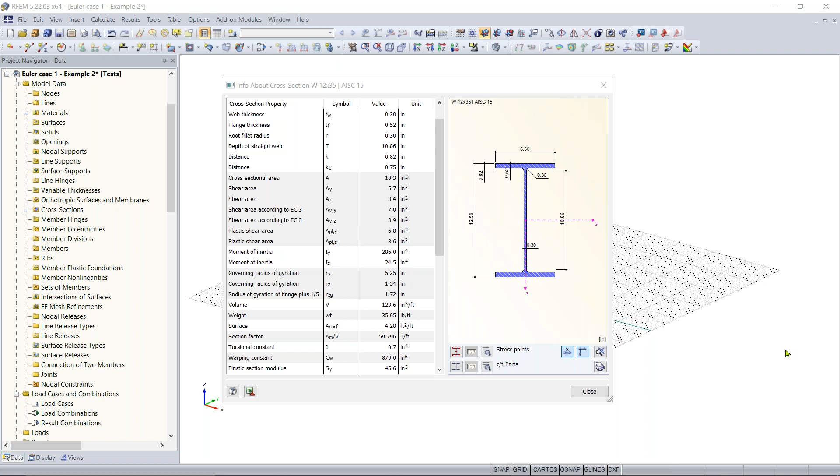I think, Amy, would you know that offhand? I'm not sure if you are muted, Amy, or not, if you're still here. Let's see if we have the Australian/New Zealand profiles. I can go under my cross sections in the cross section library, and once that opens up, yeah, I'm not sure offhand if we have those or not. I can always just let you know later on through email if we're going to add those or if we already have them, so I can find out for you after this. Oh, did you? Okay. Yeah, I'll comment on that — we do have those profiles. I know we have Australian profiles. If New Zealand follows the same code, then those should be available directly within RFEM. Okay, yeah, it looks like he or she thinks they saw it, so yeah.

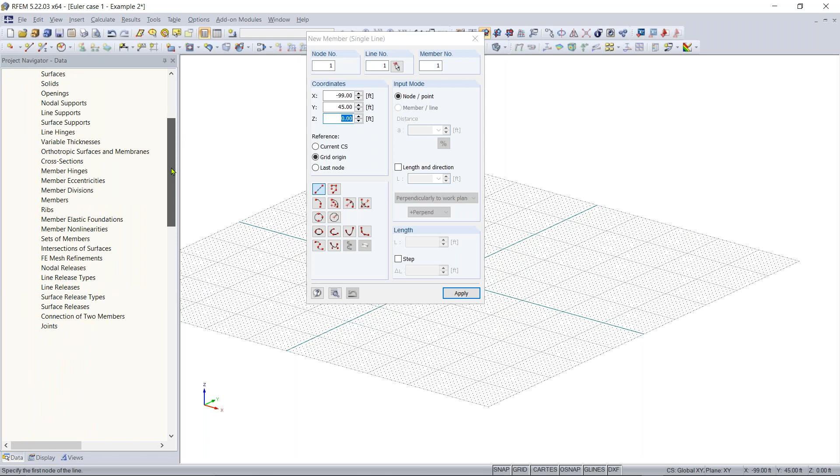As a follow-up, the attendee is wondering if it has add-ons with international codes. All of these add-on modules within the program—we won't get into them today—provide design for the model, while everything Alex is covering today is just analysis. There are codes, for example many steel codes, for many international standards including AISC, Eurocode, Chinese, Australian. That's probably what you're looking for. If you don't see what you're interested in, send us an email—maybe we could consider it for future development.

Thanks, Amy, that's a good explanation. So I'm not going to get into any of these today, but within this example I will go into the RF Stability add-on module. That's not per any design code, but we'll get to see how the add-on modules work within RFEM.

I'm going to continue creating this member. If I want to create it to the height, perpendicular to this grid, I need to change what plane I'm drawing in. Right now if I drew, it would only be on this plane and not perpendicular to it. I can change my work plane by going up to this toolbar and set it to the YZ plane or XZ plane, so I can draw a perpendicular member into the Z direction.

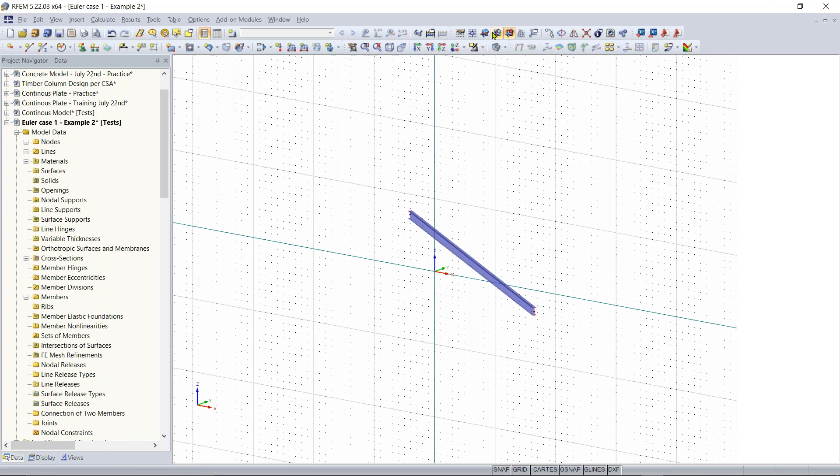I'll put this back to the XY plane. Let's say I don't want to change my work plane and just want to draw this column right on the origin. I can go back to the New Member tool, check the option called Length and Direction, set this to perpendicular to work plane, go over to my origin, and say I want to make this column 30 feet high. I can enter that using my numerical pad, hit enter, click on my origin, and that will enter the column.

And that is—one second—that is not 30 feet high. So I can easily change this. I'll highlight this node, double click on it, and make it 30 feet high in the Z direction by editing this coordinate. Right now it's only 3.28 feet high. I can enter 30. Oops. And it's telling me, okay.

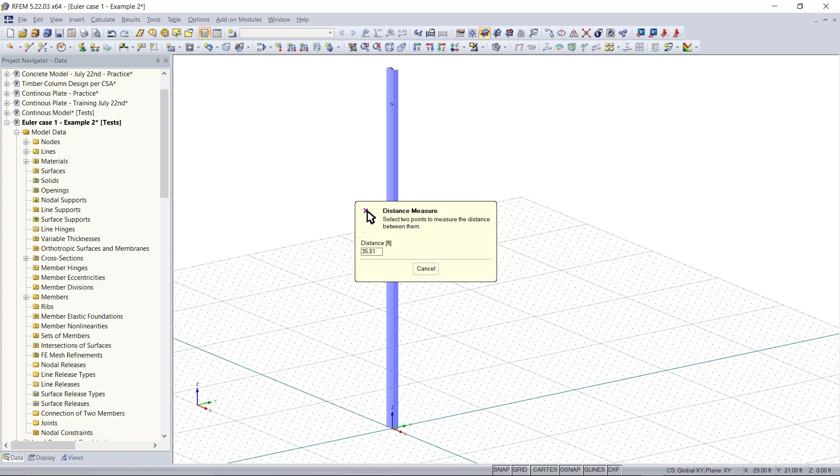Just going to double click on this node again, enter 30 feet. There we go. So now I must have had my origin selected as well, so that's the reason why it was giving me that message. I'm just going to make sure... yeah, so okay, I see what happened. I had my origin selected at the same time. I'm just going to delete this top member. And now we have our column that's 30 feet high.

So now I would like to add a load. But before we add the load, I'm going to highlight this bottom node here, and we have to add our supports. So I'm going to add a rigid support to the bottom of this column. This is going to be a nodal support, and I want this nodal support to be fully rigid. You can see these check marks are telling me that it's fully rigid and fixed in translation and also rotation. So I'm going to click OK. And now you can see that support has been added to the bottom of my column.

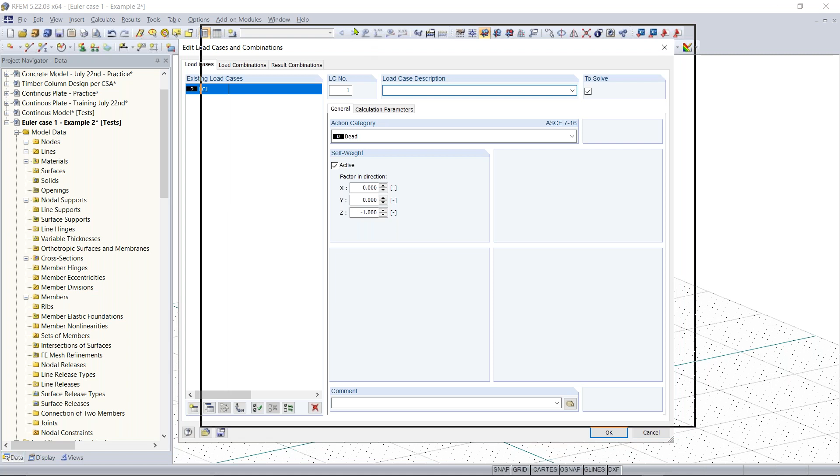And I'm going to apply the load to this column. Before we apply the load, instead of having to go create a new load case and combination, we can go up here to new and nodal load, which is the load we're going to apply to the node. Nodal loads are point loads. So I'm going to click new nodal load, and that's going to bring up the edit load case and combination, because the program recognized that we don't have any load cases yet, and loads have to be assigned to a load case. This load case I'm just going to name it test.

And it's going to be in the action category dead. Again, I'm just going to turn off the self weight, so I'm going to put in this name here and self weight off, just so we know. And once that's done, I'm going to hit OK.

And now we can apply our loads. So the program is smart enough to know that now we want to apply our load. For this nodal load, I'm going to apply a -5 kip load axially, and then a 2 kip load laterally, so in the X direction, and the axial one will be applied in the Z axis. You can see that in our diagram down here, which gives you an idea of what the loads will look like. And I'm going to click OK.

And now you can see my cursor has an arrow next to it. I can select this nodal load, right click, and rotate the structure, and you can see that those loads have been applied to the top of the column.

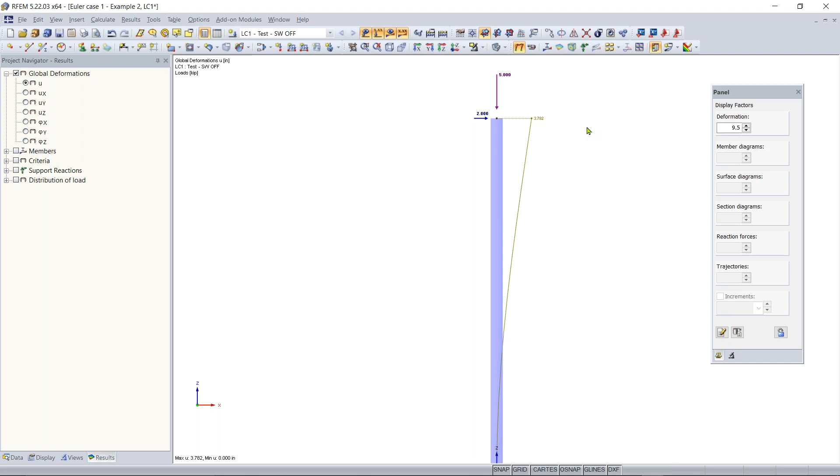So now I want to show you something important, and this is very important to know when working with our software: if we go up here and run our calculation, the internal forces and deformations will be calculated. If I look at the side view, I can see my global deformation is at 3.78 inches, in the X direction. We can also view our internal forces of this column or member, and get a look at our moments and shear. Now I want to show you how this linear, or first order, calculation differs from a second order calculation.

So we'll go back to looking at our global deformations. And now I'm going to open up the load cases and load combinations window again. I can do that by going up here to this button, going to the drop down, and selecting load cases and combinations.

So generally under this load cases tab, load cases are calculated based on a first order analysis, and load combinations are calculated based on a second order analysis. That's just by default, and those can be changed.

So under load cases, for example, I can go to calculation parameters, and you can see that the load cases for the method of analysis are set to a linear analysis. You can change this to a second order analysis.

So maybe you recognize second order analysis from the phrases little p delta and big P delta, and you can change these. Let's say I want my load cases to be calculated based on a second order analysis. I can change that. The difference between these two is a first order analysis assumes that the equilibrium of the beam or column is based on the undeformed system, and the second order sets the equilibrium based on the deformed system. So I'm going to set this to second order.

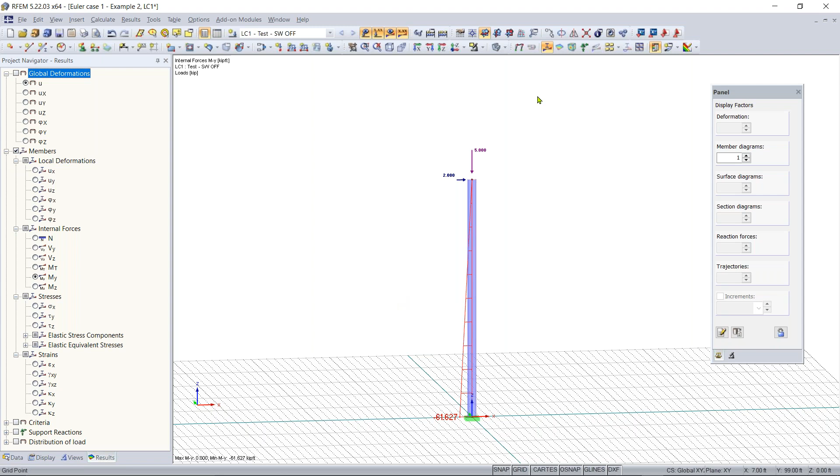Another note I'd like to make is that members in RFEM are determined to be a beam or column solely based on the loads and how they are applied to the member. In this case, we have a column because our loads are applied axially to our member. If we had a lateral load placed at the middle, RFEM would assume this is a beam instead.

So now I'm going to move on to checking the stability of our structure. To do this, we can use the add-on module RF Stability. But before we get into the add-on module, I'd like to change my loading real quick.

I'm going to double click on my load, and this will allow me to edit it. Now I'm going to change this from 5 kips to just 100 pounds, so I'll make this negative 0.1 kips, aka 100 pounds. And I'm going to turn off this lateral load, I don't want it. I just want this negative axial load. I'll click OK, and you will see our load changed.

The only reason I changed this is just so we can make this structure completely stable. And now I can open the add-on module RF Stability.

To open an add-on module, you can simply go down to this list of add-on modules. I want to find RF Stability. You can see I have a favorites folder where I saved my favorite add-on modules, and I'm going to double click on RF Stability. You can see the add-on module has popped up, and they are just basically dialog boxes. RFEM is still running in the background, we're still in RFEM.

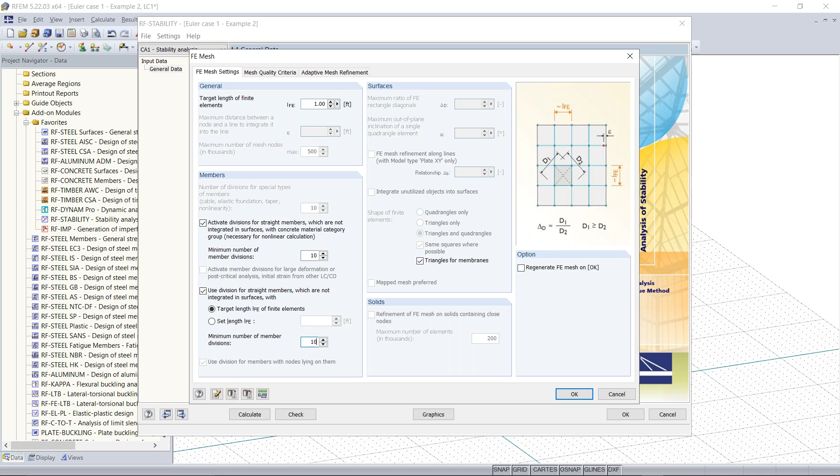It's also important that we activate the division of straight members. This is already activated by default when you go into the RF stability add-on module. We can edit the FE mesh settings for members with this button. For more accurate division, I'll go to minimum number of member divisions and change it from 2 to 10, then hit OK. All other options are left as default, and I'm going to hit calculate.

I'd also like to mention that the load case is set to load case 1.

Once that calculates, it takes all of the information from RFEM, all the internal forces and deformations, and brings it into the stability module. Now we get a load factor and a critical load factor here.

The critical load factor is the amount you would have to multiply the loads by in order to get an unstable system. So if I wanted to make the system unstable, I would have to multiply the 100 pounds applied to the column by 135 times. We also have P-delta, or second order analysis, activated, so it's not completely linear in that sense.

It can also be looked at as the total percent of load your structure can take, this critical load factor. Within this module we also have our effective lengths here, and our effective length factors.

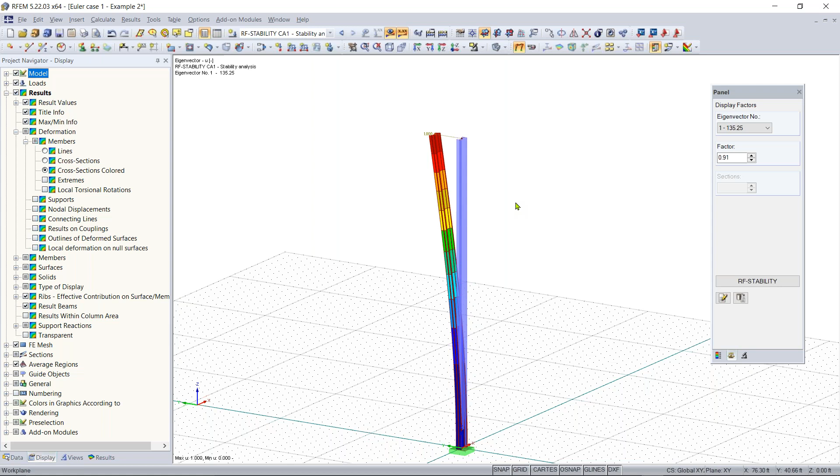We can also take a look at these results graphically and look at the eigenvectors. If I go down to the graphics button, I'll get a new tab in my panel for eigenvector numbers. If we want a better view, or want to turn the colored cross-section on, we go to display, then under deformation we can turn on cross-sections colored, to get a better idea of how that eigenform looks. Now we can also get a better look at the first buckling case, or buckling form.

We can take a look at the second buckling case, third buckling case, and the fourth buckling case. For this first one, it's clear the column will first be unstable in the weak axis direction. The weak axis direction would be perpendicular to the flange.

This makes sense because this is the lowest moment of inertia direction. We can take a look at our moment of inertia again and see that the moment of inertia about this z-axis, compared to the y-axis, is the lowest right here. So we can close this.

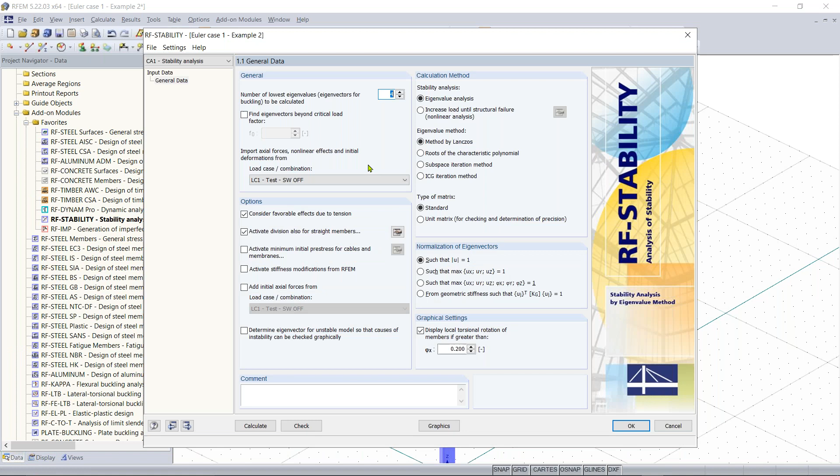Now we can jump back to RF stability and take a look at the effective length factors again. I have to recalculate real quick, this should only take a few seconds. And it's back up. Now we have again our effective lengths here and our effective length factors.

Now I'd like to show you what it looks like when the structure is unstable because the load is too high. I'm going to click OK, go back to the drop-down window, back to load case 1, and increase this load until the structure is unstable. I did this in preparation and found that it was unstable at -14 kips applied.

Once this loads, if I zoom in and out and run my results, we have P-delta, or second order analysis, activated. So if I run my results, I'll get a calculation error message telling me my model is unstable, and that I should look at the critical load factors and buckling in the stability add-on module.

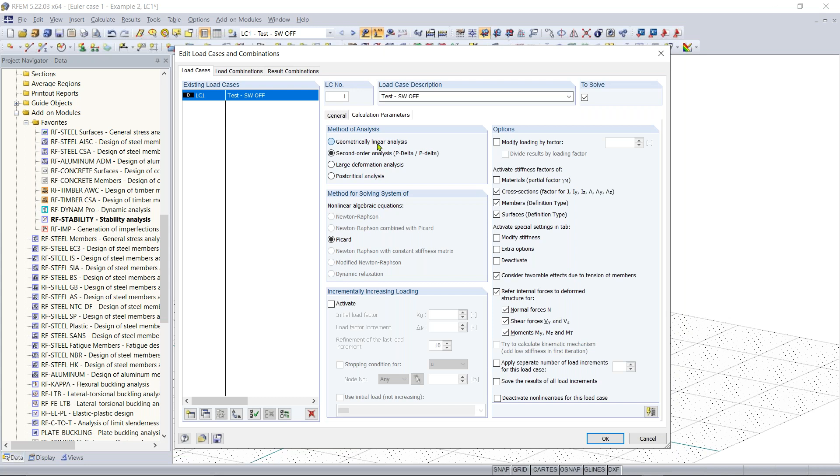I'm going to close this, and turn off the second order analysis, turning this into a linear analysis. I'll go back to my calculation parameters, set it back to linear analysis, click OK, and then run my structure in RF stability by going to calculate. It's going to take those internal forces, material, cross-section and members from RFEM.

And then it'll show me my critical load factors. You can see my first critical load factor is 0.966, and that is below 1. You never want any of these critical load factors below 1, because that's telling you your structure cannot handle the given loads applied to it. It can only take 0.96 - you could say it can only take 96% of the given loads.

So that is what it looks like when your structure is unstable in RF Stability, and that's how you will know. So I'll click OK.

And now I would like to pose a question. That should come up right now. I'll give a minute or so until the majority of everyone answers.

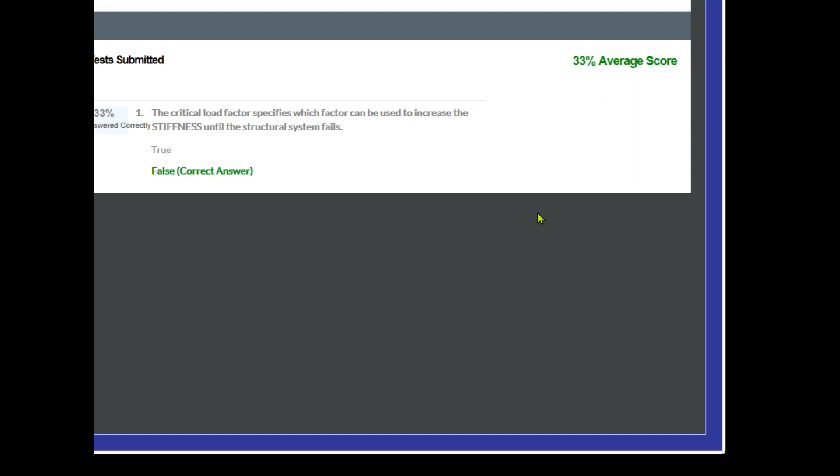So again, if your critical load factor is below 1, that means your structure can only handle that certain percentage of the loads given. If anybody has any more questions on that, I can try to clarify it a bit further as well.

So we'll move on to the moment frame. I'm going to go back to my load case 1, turn my results off, and change my load by double clicking on it - decreasing it to 5 kips. I'm going to have only the axial load, no lateral loads, and hit OK.

And I'm going to change the height of this column by highlighting my node, making sure only one node is highlighted this time, double clicking on it, and changing the height from 30 feet to 10 feet. I'll hit OK.

I want to create this moment frame, and the easiest way to do that is to simply highlight my whole entire column here, then hold Control, drag, and make a copy of this frame. Then I can create a beam.

I'm going to go up here to New Single Member, then go to Import from Cross-Section Library, and go to I sections. Everything's set, so I just want to go to section 8 by 15.

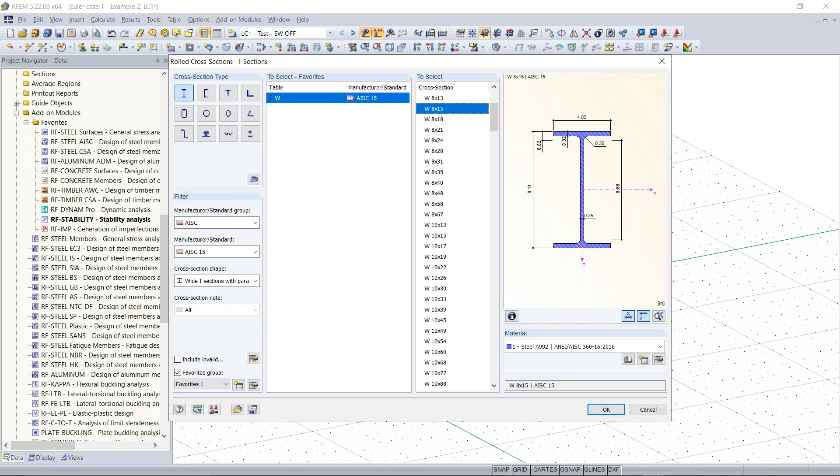So the beam at the top of this moment frame is going to be an 8 by 15. My material set is still A992. I'll click OK, and click OK again.

Now I can draw my beam. Let me just get a better view of this. I can draw my beam by selecting and left clicking on the top node here, and drawing it across, selecting the node on top of my second column. Now we have our moment frame here.

So now I can run a calculation on this moment frame as well, and that should only take a split second. Now I can take a look at my global deformations - I can see them only in the Z direction if I'd like the Z component, or I can just have the result component.

I can also take a look at my internal forces, and my moments. Right now my moment diagrams aren't being shown, so let me just turn this on.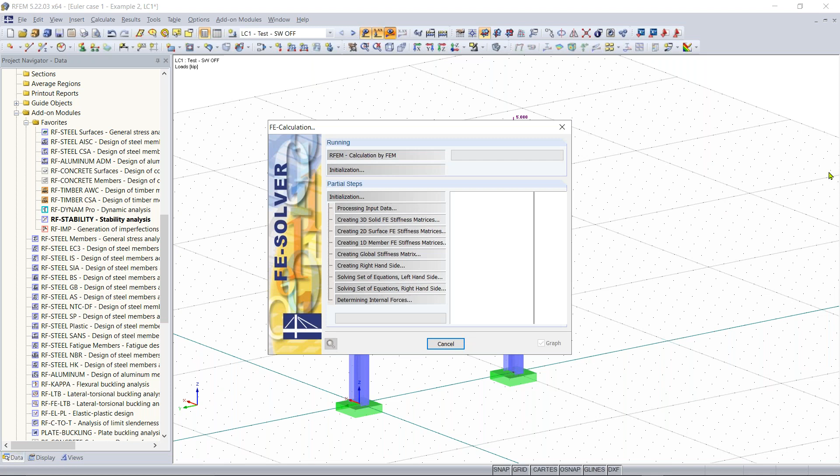I see there is a question. Yeah, so we have a question asking, is it by default the analysis will segmentize the column into 12 smaller segments? I counted 12 roughly on the string, could be wrong.

This all comes down to essentially just the settings within the calculation parameters of how a beam is divided. For this one, you can place FE mesh along the straight elements, under FE mesh settings.

Right, yep, I can show that real quick as well. Under FE mesh settings, you have the checkbox here to activate member divisions for straight members, which are not integrated in the surface. You can see here that's set to the target FE length. So that's turned on - you can modify the FE length with that. Hopefully that makes sense.

And that'll increase accuracy, correct? Right?

Okay. Yes, that's correct. Okay. Yep, no problem. Good. Thank you for that clarification, Amy.

So now we have our moment diagrams here shown with our results. We also had our global deformations here as well. I can show those color cross sections again.

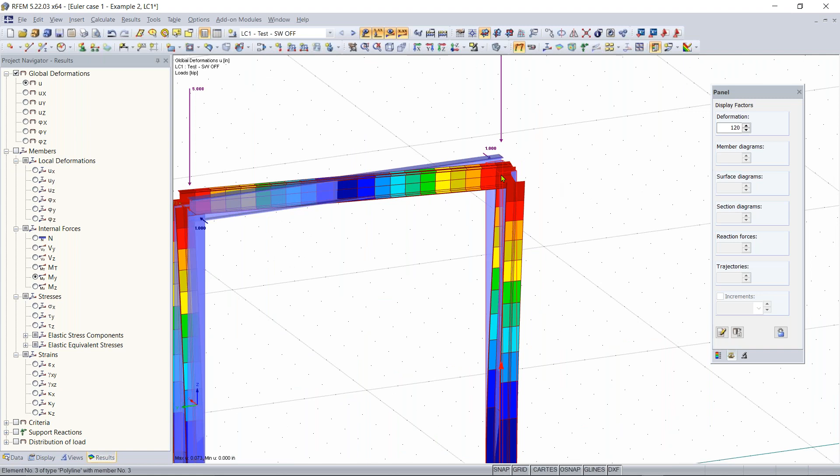Let's say we only wanted to keep this moment frame in the ZY plane. We can simply select our nodes here. Rotate this, select our nodes. I can double click on both of these nodes that are selected, 1 and 2.

And then we can add these 2 nodes here, and we can keep the deformations in plane. So for translation, I don't want them to move in the X, but I do want them to move in the Y and Z. So I can turn that on and keep rotation all unlocked. Click OK.

And then I can run my results again. And then we can also take a look at our stability and make sure that our moment frame is stable. So there you go, our deformations are in plane.

And I can go back to our stability, run a quick calculation. And our stability will give me the critical load factor. So it's well above 1, it's at 81. So we are completely safe with these loads applied.

So now we can also, again, look at the different eigenvalues and eigenvectors and cycle through those as well.

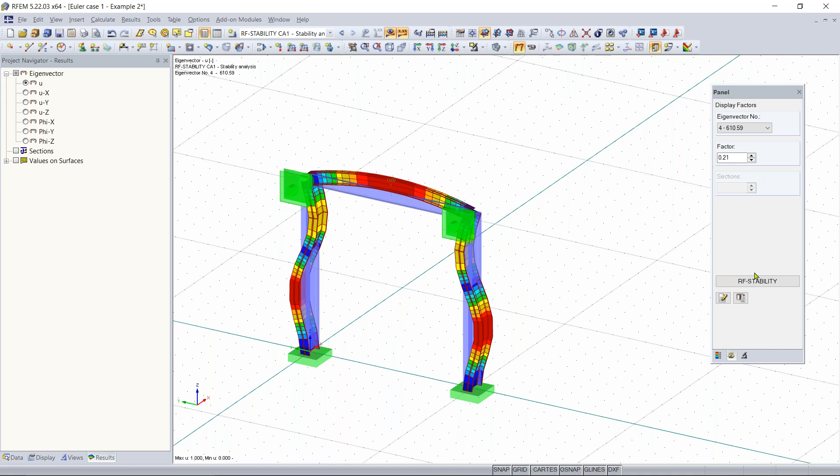So I can answer that. I think that there are some conditions within the Eurocode, for example, that if the critical load factor is less than 10, a second order analysis should be run. And then if the factor is less than, I don't know, I want to say 2 or something, then the structure needs to be redesigned. But this is all code specific. And here within the AISC, we do not have requirements that I'm aware of. So it all just depends on which code you're designing to.

Okay. Thank you for that clarification, Amy.

So yeah, right now this is the end of this example, and the next example is the concrete model. If there isn't any more questions, I can move on to the concrete model, but we can take this time right now if anybody wants to ask more questions, or we could have just an open discussion. I'll just start opening a new model now, and if we want to get into those questions, we can do that.

So I'll open up a new model and name this one concrete model 2. With the concrete model, it'll be a 3D model, and it'll be according to ASCE 7-16. With this model, we can create our combinations automatically, our load combinations, and everything else we can keep the same by default.

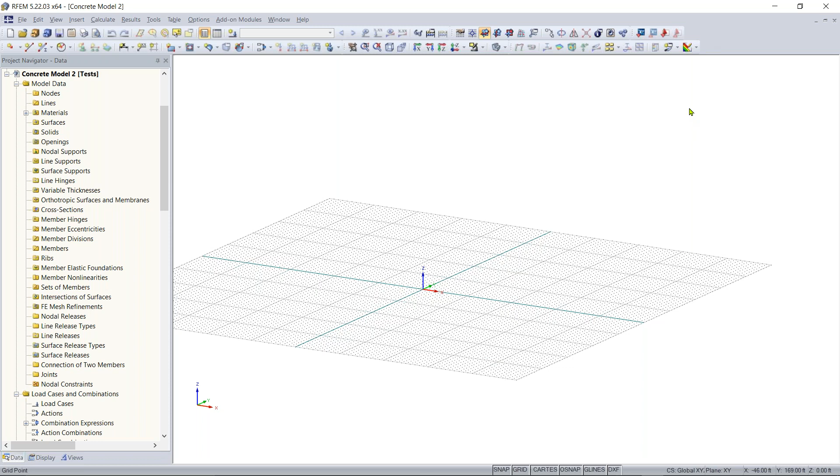So now we have our blank work window. I'm going to start by making sure the grid points are spaced out dynamically according to the size of the model. My grid spacing for each grid point is 1 foot, so I'll click OK. Oops, sorry about that, let me turn that back on. There you go, so you should see RFEM again.

So for this concrete model, basically we're going to model this simple structure. I can show it on the PowerPoint real quick.

And I see that it is almost 3:45, so we're going to be able to just start this model, but we're not going to be able to finish it. But I'll show you what it looks like. One second, I'll pull it up.

So this is what the model looks like. It's basically a large floor slab and a large ceiling slab with a hole cut out for a spiral staircase. And again, this is the floor slab. We have a support over here because it is connected to an adjacent building. And then we have our concrete columns, along with a window back here for an opening and a rib member acting as a downstand beam.

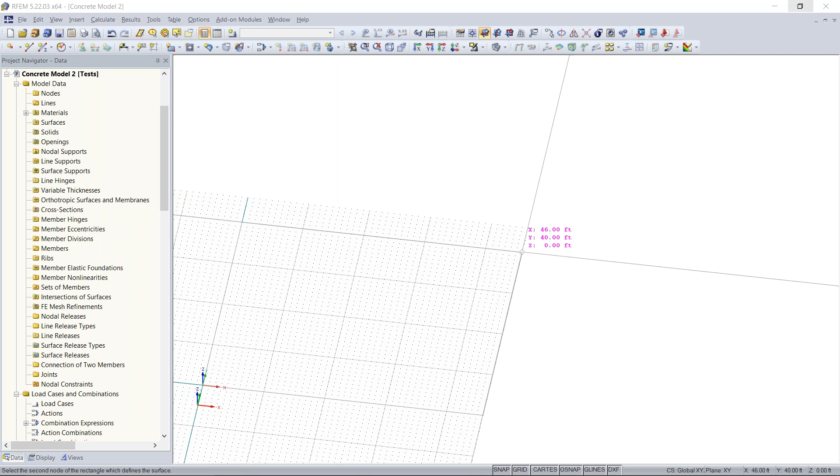Now the beginning of this floor slab is going to be connected at the origin, and the whole thing is going to be 46 by 40 feet. So we're going to go up here to 46, and in the Y, 40. Click there. Let me check that.

So it looks like Amy is answering your questions.

Okay, so now I'm going to move on and create the nodes that are going to act as the bottom of our columns here. There's multiple ways you can model in RFEM. I'm going to show you that you can take this node from the origin and just make a copy of it using the move and copy tool. I'm going to make 1 copy of the node, moved 2 feet in the X direction and 2 feet in the Y. I can hit enter, and that node is created.

Now we can use that node as a basis for laying out the rest of our columns onto this concrete slab. I'm going to select that node again and make 2 more copies of it, with the displacement vector at 16 feet in the X direction. I'll click OK, and now you can see these 2 more nodes in the X direction, 16 feet apart, have been created.

Since we're going to have 4 columns in this row, I'm going to hold Control, copy this node, and it's going to be symmetric to the left-hand side node that we have here. Then I'm going to copy this whole entire row of nodes.

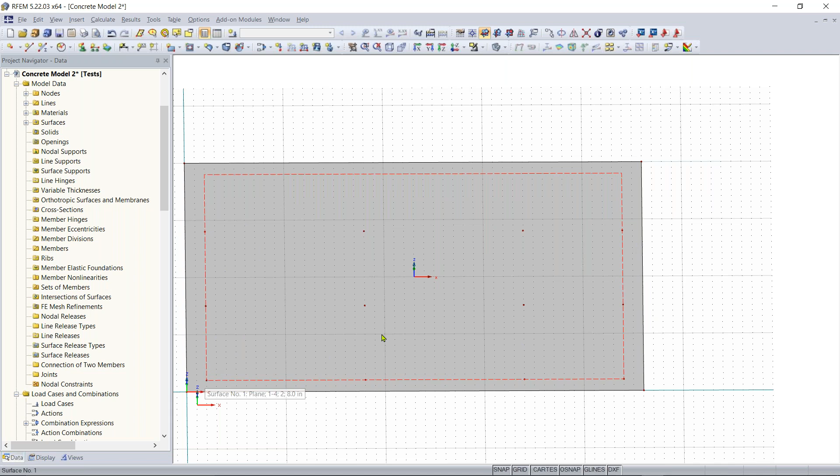You'll come to learn that the copy and move tool in RFEM can be your best friend at times when doing things that are symmetrical like this. So always keep that in mind.

After that arrangement is done, I'm going to show you that you can also go into your display tab down here in the project navigator. Maybe I want to view the numbering for my nodes and lines, etc., so I'm going to turn on numbering. Now you can see that I get the numbering for my nodes, my lines, my surface. This kind of gives you an idea of, or allows you to be more organized with your model data.

So now I want to create the walls for my perimeter here. To segment these lines, I'm just going to divide them to give me the length of my wall. I can do that by going to divide line, graphically, and then I want my wall to come out from this corner right at this node here, so that's going to be at 12. I also want the wall to come out from this node right here to line up with this axis here.

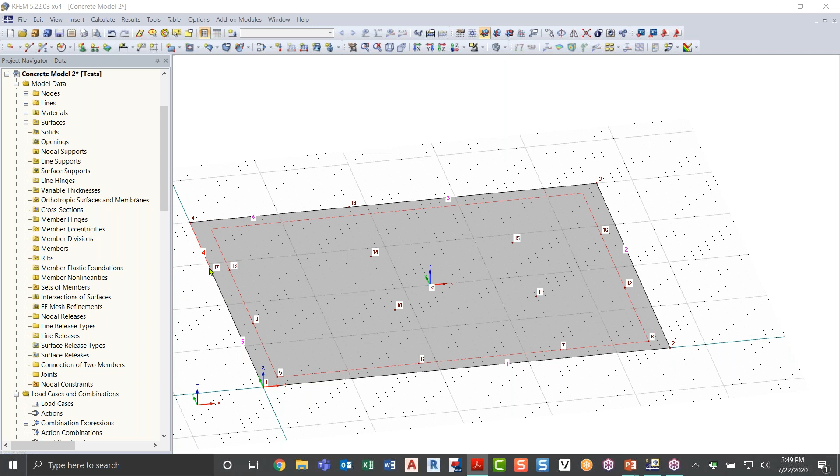So I basically just divided this line here because this is where the wall is going to connect. That's one way to divide lines, I just did it graphically. You can also do it with the other 2 options under the divide line tool. Now I would like to create my semicircle surface over here that's going to be the basis of my spiral staircase.

So I'm going to go up here, and under the rectangular surface tool, there's a little arrow you can click, and you can see we have a multitude of tools where you can create almost any shape surface you'd like. I'm going to use the semicircle tool.

My semicircle is going to have the same material properties and thickness as my surface here. Another thing to mention is there are multiple surface types and member types you can choose from. For surface types, you can change the stiffness to orthotropic to customize it, or make a null surface that supplies no stiffness or rigidity, just for reference. You can also use completely rigid stiffnesses to distribute a load onto something like that.

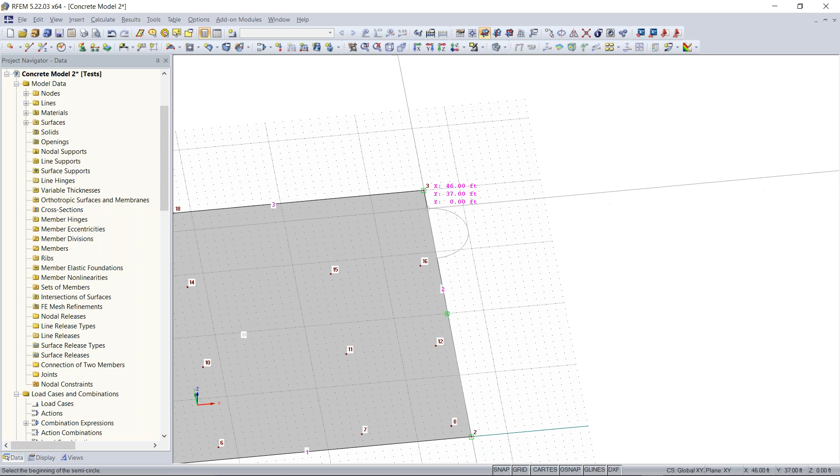So for this, we're just going to keep this standard. I'm going to click OK. The radius of this semicircle is 7 feet, so I'm going to draw the origin or center of it 7 feet away from this top node here. So that starts at 4640 and goes down to 4033. Now I can draw the semicircle, click again, and then right click to exit out of the tool. So now I have my semicircle here.

Now that our bottom slab is created, we can move on with creating our ceiling slab. An easy way to do this, since our ceiling slab is basically the same shape as our floor slab, we can use our best friend, move and copy. I'll select the whole entire slab, hit move and copy. I just want to make one copy, displaced 11.83 feet vertically in the Z direction. I'll hit OK, and now we have both of our slabs here.

I can look at this in isometric view to get a good look at that. Now I want to look at the top-down view, or the reverse Z direction, so I'm looking at this from the top. I can also get a perspective view, so maybe I want to be able to see both my ceiling and floor slab.

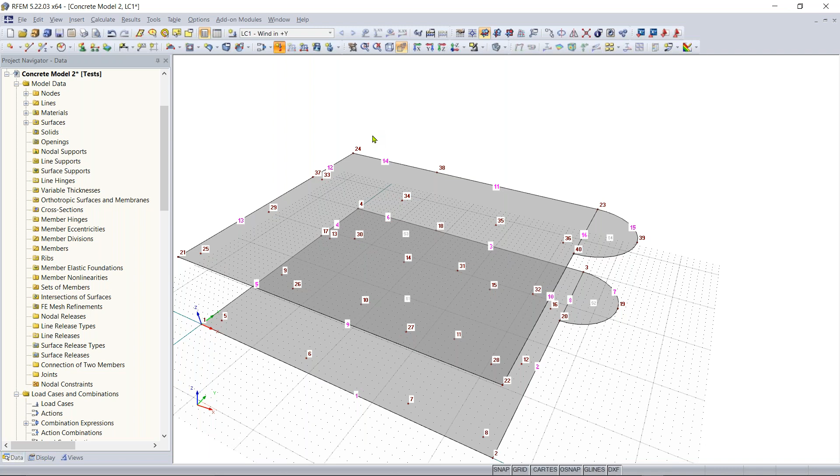So there's a question: can the copy function also include copy load? Assume the loads are already pre-assigned to the model. Yeah, so if I had a load or a point load, I'm just going to apply a point load real quick, as my computer catches up. I'll just make it -1 kips. Click OK, put a point load there, and then take this out of its perspective view.

I can copy that load and select it, and I can either hold Control down and drag this load and place it wherever I want. You can also use the move and copy tool to make a copy of the load and move it wherever you want. Actually, let's say I just want to move it. I might be wrong about the copy and move tool—do you know about that, Amy? Yeah, you should be able to use the move copy tool for loads as well.

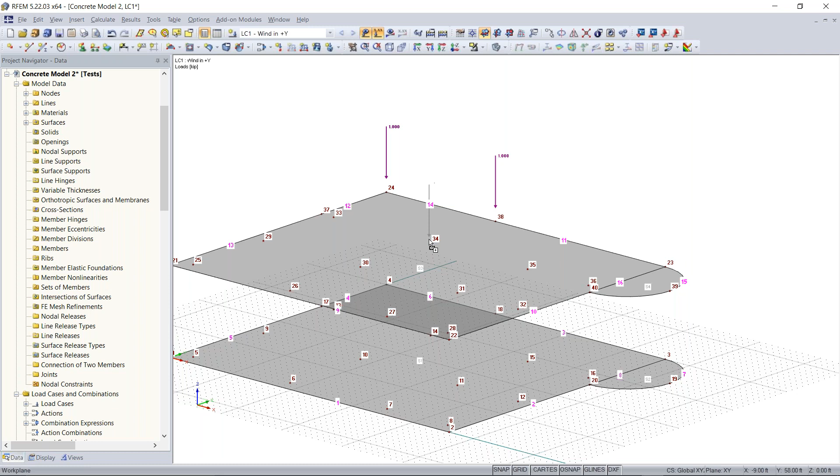So if I just use this—oops—maybe if I want to move it this way, you need to select 2 points. Okay, yeah, you're right, so create that displacement vector, if I make one copy. Yeah, so maybe the move copy tool doesn't work with loads. I thought it should—something we'll have to look into. But yeah, the drag and drop works fine for copying loads as well. I think the problem might be that it doesn't know these are nodal loads, so if you're going to copy it, you need to copy it onto another node—you can't just copy it onto an arbitrary location.

Yeah, so I would just use hold Control and then copy. You can also do that for surface loads, and you can do that for uniform or for linear loads as well. So yeah, I wouldn't use the move and copy tool for loads—you can just use Control and copy.

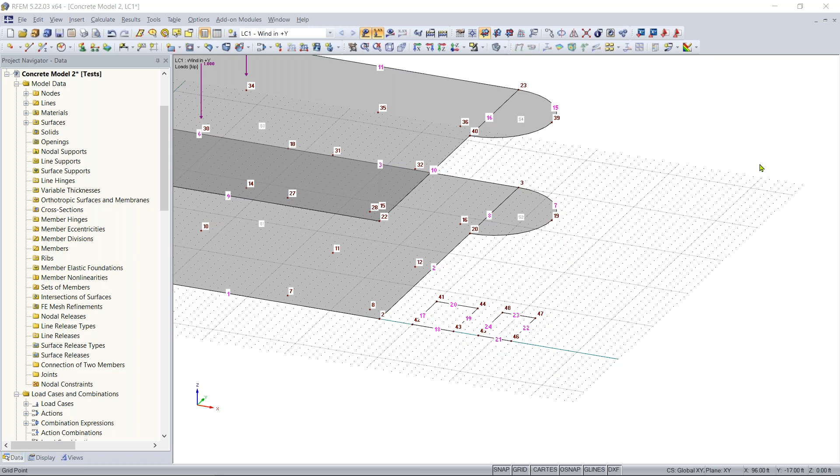If there's any more questions, we have about a minute or two left, we can keep answering them. This was also what Amy was talking about earlier with deleting these surfaces - they just leave the boundary lines and then you can connect them and recreate the surface like that and merge them.

We have one more comment: seems like if I need something, it should be in the project navigator. Yeah, for the most part, the project navigator really has most of the elements that you need - I think it's the most intuitively laid out. You can also find a lot of things in the insert menu, such as the model data. If you're looking for those nodal constraints, they're also in there, along with loads and things like that. Lots of options, lots of different ways you can go through with your model.